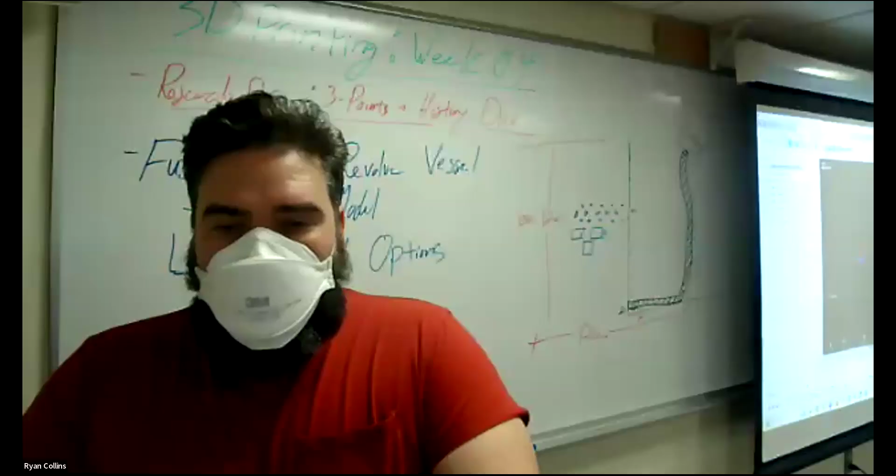Okay, so tonight, like I said, specifically we're working with the Revolve project, making a Revolve vessel, ideally a planter to hold a little plant, using the Revolve tools. So the main goal here is we're simply making a partial profile that we then use the Revolve tool to spin around and make a three-dimensional solid that is curved rather than straight up and down, which we did with the extrude tools.

With that, we're going to use the different tools to cut holes in the bottom, drainage holes, make a tray. We also have some advanced options to make patterns, things like that. We'll get into it in a moment. So let me hop over and we will get to that.

So again, I just showed you this. The basic project simply taking an object, taking that profile, spinning it around using the Revolve tool, which if you mouse over Revolve, as you can see, takes a profile, spins it around a chosen axis or axis point, and creates a solid, round shape.

We're making this in two separate components, not just bodies, but components. If you look here on the project tree, the very top now has this little symbol instead of the solid square that it normally has, a symbol for a stack of squares, or cubes rather. This is the symbol for multiple components.

A component is simply just an organizing feature, just an organizing method within Fusion. But an individual component can have its own origin point, its own bodies, its own sketches. So you can even nest components within components.

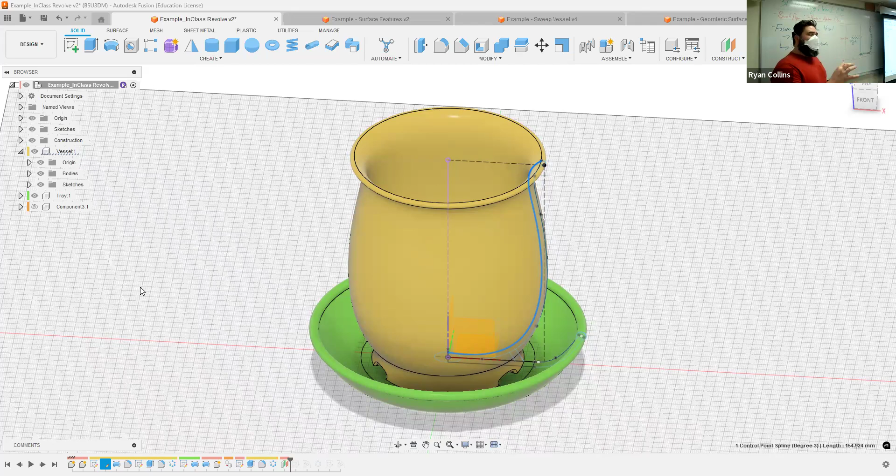The reason for doing that, one, is so you can help organize the whole thing, keep things a little bit separate. The other thing is for how the joint tools work within Fusion, the things that actually let you animate parts. It works by making sure that things are separate components, not just bodies within the same component. So it's not just a way to organize, it's also a requirement feature. We'll get into the reasons why later when it's more applicable, but that's how it goes.

And here we use the extrude tool and the extrude. Actually, in this case, I used emboss because I didn't want the holes to just be straight through. The holes here actually angle with the curvature of the body. So these are all straight through at an appropriate angle all the way around, and then use the circle pattern tool to take that pattern and spin it all the way around the project.

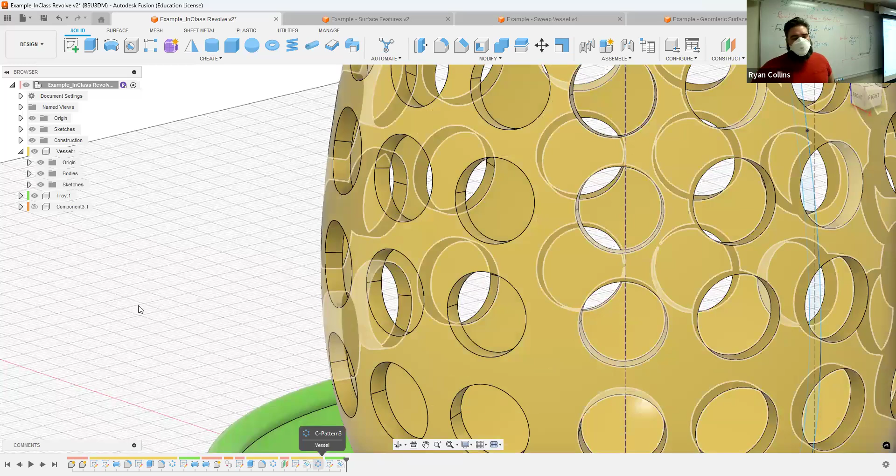The zoom box is in my way. And also the text—text can be applied with the emboss tool to give actual curvature as well, so it's not just flat there. So the whole point there is making stuff actually fit.

For examples, for surface features, I talked to you all about this one. Now this one is very basic, just using the emboss tool to create extrude, or to create projections off the surface. Then I use the fillet tool to round them out.

I also use the extrude on top to cut a profile directly forward, and then use the circle pattern tool to create multiples of that as well to create that scalloped edge. Now, those are just really basic.

I'm going to show you how to use the different tools to create, instead of just single rows, offset rows and such.

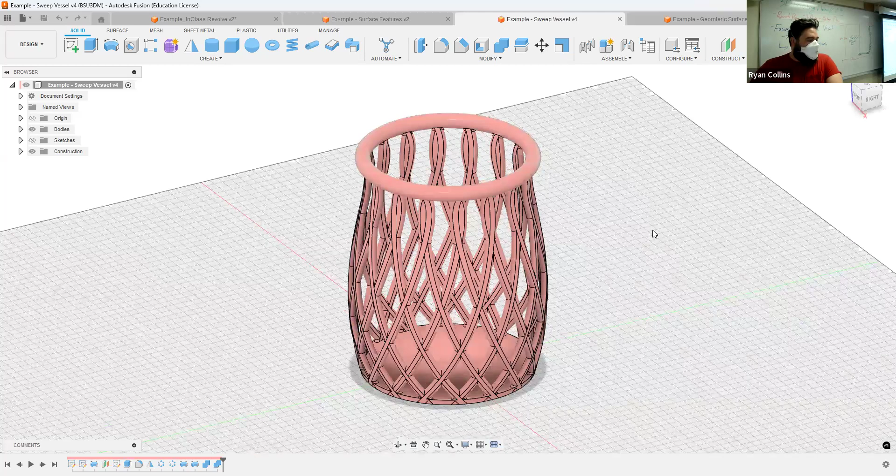We can certainly take that further by using the same tools to create sections and then making multiples of those sliver sections to create things like baskets and such. This is the exact same set of tools, just taken a little bit further. And we could even go really a lot further.

Now, this technically doesn't use the Revolve tool, but this is using surfacing tools to create nested geometric shapes within. So you can see how you can take these really basic things and really take it much further.

So let's start simple. Open a new project. What do you do first? Save, so it'll save. All right, well, problem here is I opened everything and it's still in the keychain project. So open your data panel, make sure you are currently in the correct folder, which is the Revolve project.

Now when I save, it'll be there. Example, in class, we'll say multi-vessel.

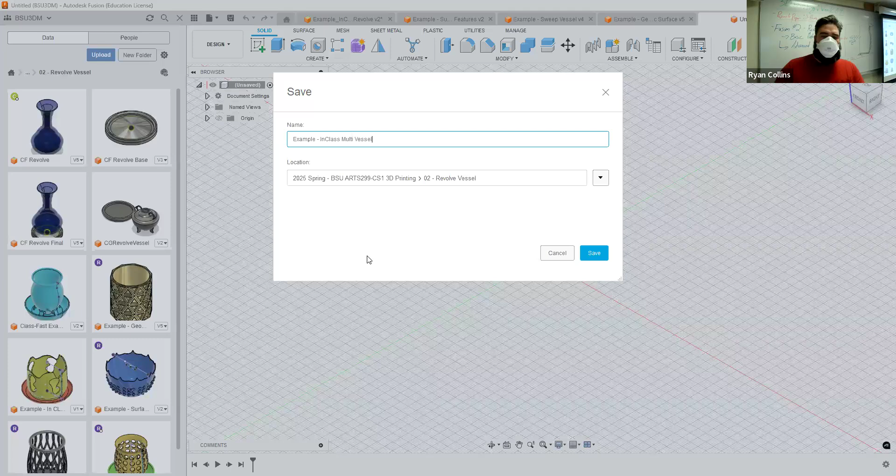So I can just use the same project, and we can do the whole thing together.

One of the quick things is just general dimensions. We want to make it roughly 100 by 120. Those dimensions are rough, you can move it around however you need. That is just a rough guide.

What I like to do is first create a bounding box, and all that is literally a reference. I'm going to create a sketch on the XZ axis, X is red, Z being blue. Working straight in front of me, I'll create a rectangle using the 2-point rectangle tool, snap right on the origin plane and origin point, then write that in manually. Let's say 100, hit tab, and it bounces to the other option, 120. There we go, F6 and it resizes.

Now with this, I don't want to leave this as a solid. I'm going to double click on here and press X on my keyboard, or come over to line type, construction. That leaves it as this little dotted line. That's it, finish sketch. I just want that as a reference point.

If you want to leave those dimensions out, go over to the sketch and slow click this to rename it. Reference box, if I can spell. You right click on there, go down to show dimension, and your actual dimensions will show up. It's kind of irritating that your dimensions don't automatically show up, but at least now you can see what the dimensions are should you need that.

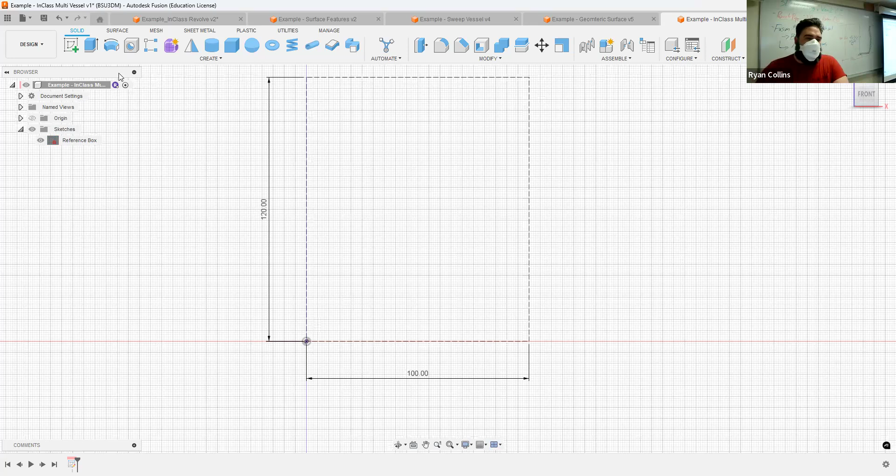Start another sketch, exactly the same spot. It's just that them being two different sketches, I can hide one or the other, make it easier on myself. For this, obviously, you do whatever you please. If you want to bring in a background image to make a reference, make it look like a certain cup or something, more power to you. You want to make it a Stein, you want to make it a Stanley Cup, anything like that, whatever.

I'm just making a basic shape, and because I want it curvy, we're going to use a fit point spline. Start somewhere on the top. You do not have to start at the top, heck, you don't even have to start at the line. You could make it bigger, smaller, whatever. The first two points, it's a straight line between them.

Once you do a third point, now it's starting to curve. If you mouse over and actually get it close to the line, it'll snap and keep on that line, but you can always move those points around. No biggie, curvy, curvy, curvy, whatever.

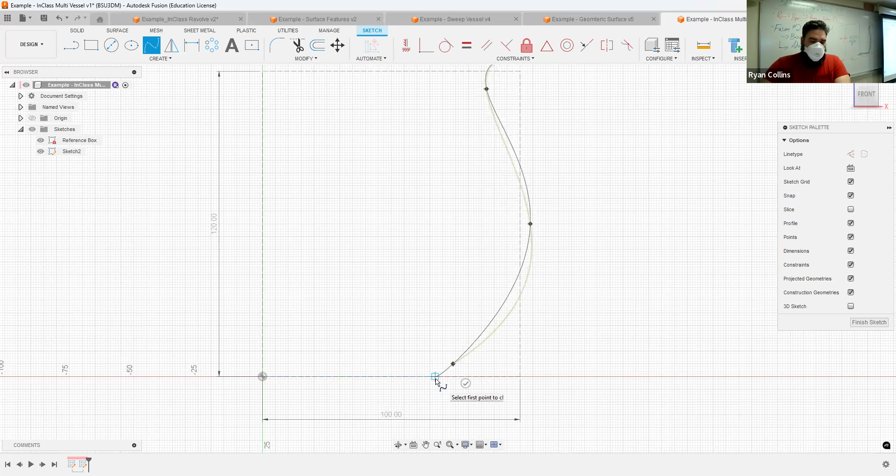From here, you can either keep going all the way, or we can just kind of draw downward, maybe to where it meets that bottom line, make the last point, and hit enter. So you have your handlebars here. We can click and drag our points around to maneuver the actual curve points, or use these green handlebars to rotate, to move the curve, stretch them - gets all wonky, or Control Z, because I don't like any of those options.

And there we go. To make a flat bottom, use a straight line tool from where I just was, straight over to the origin point. There we go.

Now, you can make your own custom inside profile, but like I said, be lazy, let the program do the work for you. I'm going to use the offset tool here. Select there, and I'm just going to drag inward, let's say 3 millimeters - so negative 3 because it's going the opposite direction. 3 millimeters is plenty fine. Hit OK, there we are.

Now, this is still not a closed sketch. These are just 2 lines offset from one another, we still have the gap between. So we can draw straight lines between here - line tool, point to point. Do the same down here, point to point.

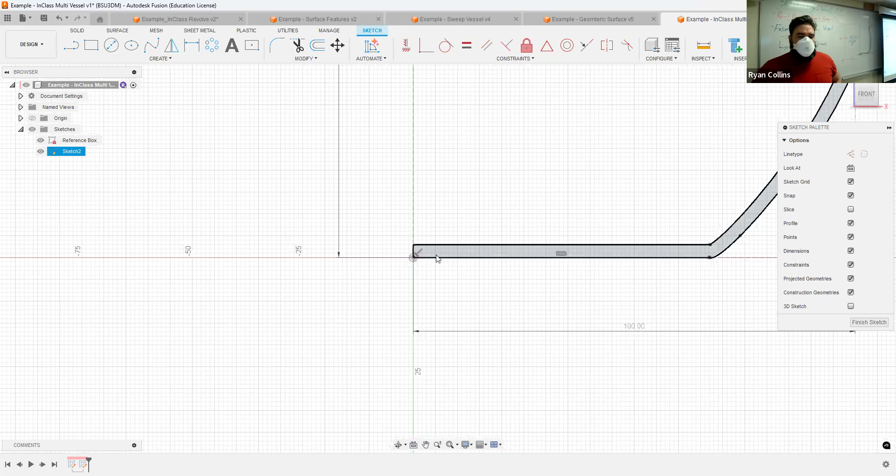It is very important, though, that you do not let this line go past the Z-axis, the up and down, because you want it smack in the middle. You want it right there because that's what we're going to use to rotate around. Technically, you could make it go beyond, but then you're going to have to do some cleanup and trimming, and it's just more work for you, so don't do that.

Now, one quick thing, as I zoom in here, I can see that there's this weird little kick down here. It went beyond them. That's going to make an odd foot, and if I went to print this, there would be a little floating cavity underneath.

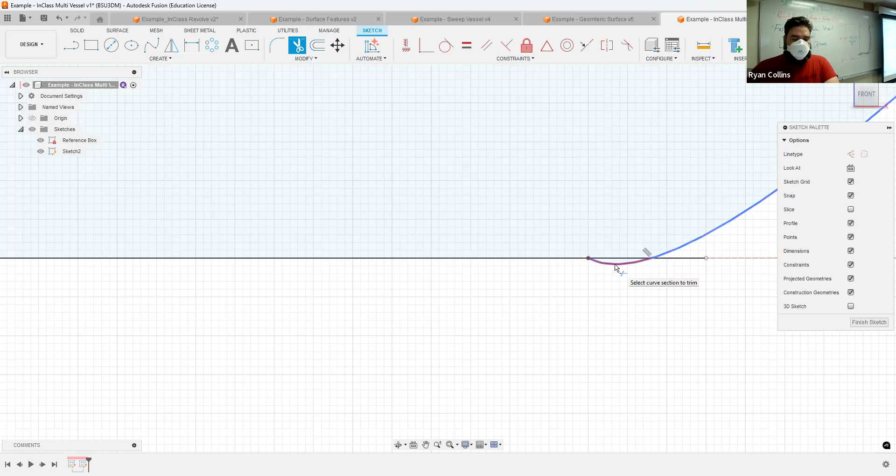So if I want to correct that, I could either use a line tool and draw straight out, then use the trim tool to trim that little chunk off. Or I could click that point, bring up the handlebar, drag it down to match that line so it's a flat line. I could probably even use the tangent tool, but it's no longer necessary there. So that's a place where you definitely can make use of the handlebar tool, and it makes quick work of what you're trying to do.

So there we go. Either one, I can leave that little line floating, or if I really don't want to, I can delete it, or I can press X to turn it into a construction line, so it's just a reference point.

That's it. Up here, if I want, I could add a curvature. Now, I do not recommend, it's really a bad idea to use the fillet tool here, because on an offset, you can do one, but if you do the other, it usually goes all kinds of wonky. See, it's trying to do some really weird stuff. So it's a lot better to use the fillet on the completed edge rather than right here.

If you really want it rounded, go to create and use a different circle, a 2-point circle, and draw from point to point. Now you've got a rounded top. However you want to work it, there you go.

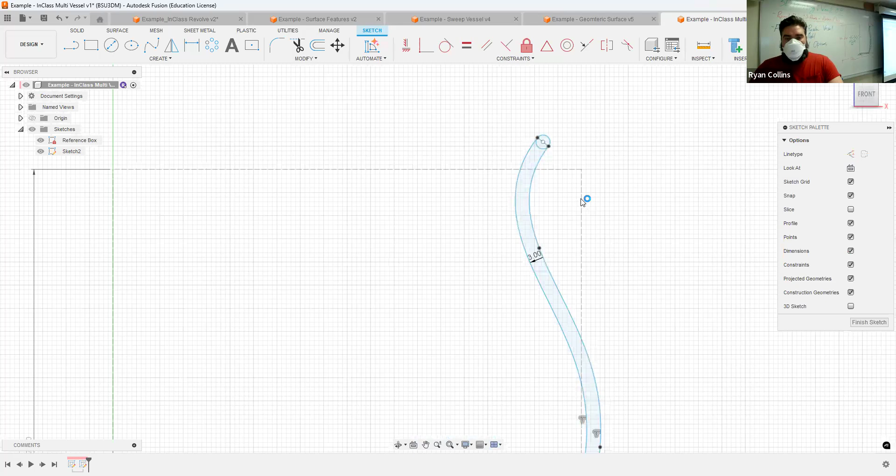All right, finished sketch, and there we are. We'll rename to vessel profile. That'll work.

Hit the home button. Let's save there just for myself, that way you've got some reference points. Profile, cool, or perfil, since I didn't spell it.

Next step is just the Revolve tool. Go there, select your profiles, which is just this one. Double check that you get, if you use that flat point, or if you added the circle, make sure you grab all the things you want to use.

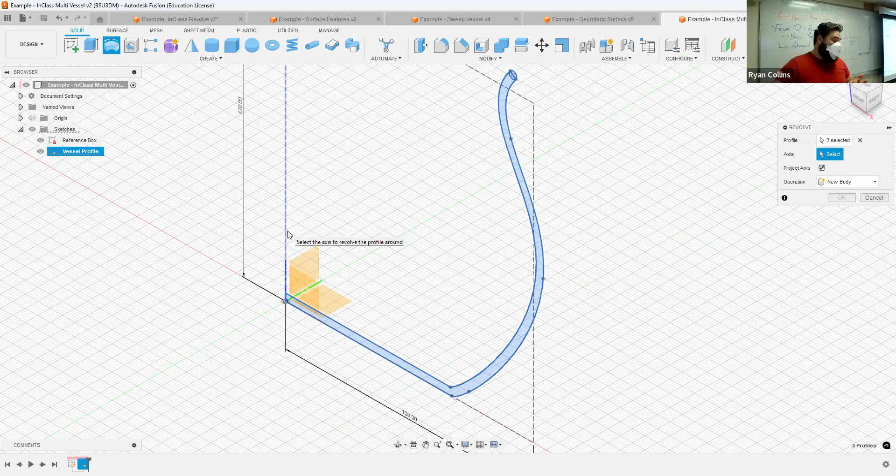Toolbox, go to what is your axis. In this case, that line is also the z-axis, so same diff. It's also why I like to draw that bounding box, it just makes it a little bit easier to see. But if you don't have one, just grab the z-axis, and bam.

Actually, that'd be a pretty nice planter. Anyway, so there you go. That's how you can create that.

If you wanted, you could even say, what if I wanted to make something flat, give it a flat back, and then maybe make a wall hanging one. 180 degrees, only make half of one, then make the backside flat. But in this case, we're going to keep it at full 360 to finish this out. Cool, all right, that's pretty much it.

Now, this one is a flat bottom. I showed you examples before of how you could go back in and alter the sketch if you need to. If you wanted to add feet or something, you could go in and make little kickstands or something like that effect.

And then you could always go in and use the Revolve tool, either the exact same Revolve tool, or you could use that. Let's go through the same process, select that profile, select the axis. In this case, I'm just going to make two little nublets here.

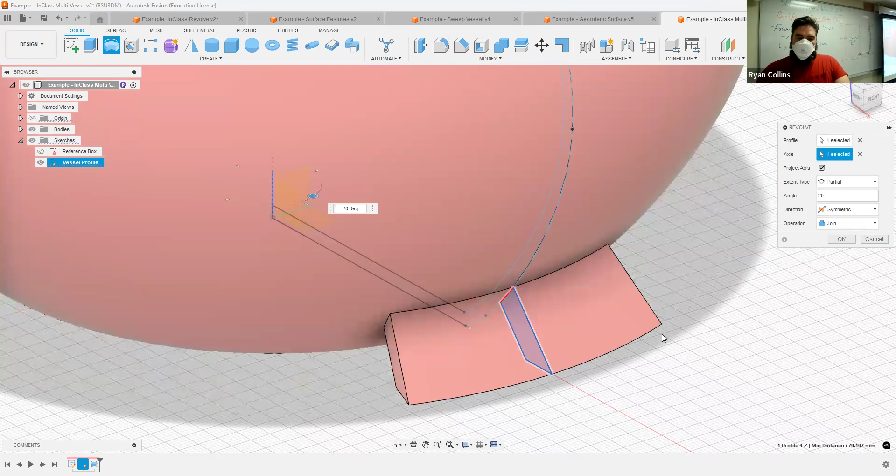And let's say, I don't know, 20 degrees. I could make little kickstand parts and make multiples of those. Go from there. I could use the fillet tool and round that out, however you want to do it. But I'm not going to do that with this one. I think the flat bottom works pretty well.

Okay, now, so far, I've left this right in the middle here, meaning right here as it is. I've not added any components.

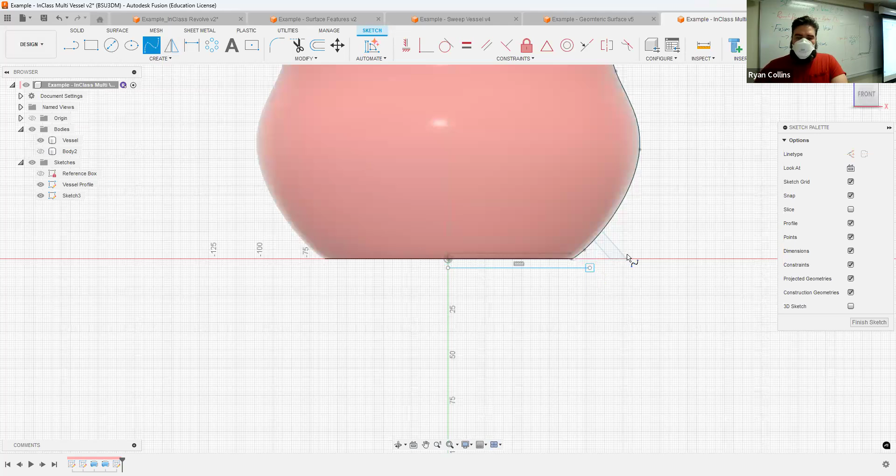One other thing I will do, since I haven't yet, might as well make the tray as well. Do the exact same thing. Sketch, front plane. Your sketch for your profile or for your vessel could either be right on here, or floating, meaning as long as you start at the z-axis, draw outward, and make a straight angle, or from there make the curvature you want. If you want to make it a slightly deeper tray, great.

This would be a point again. You could use the handlebars to adjust that curvature so it's a little bit smoother transition. Cool, that works. Same thing again, offset tool. Let's make it go the other way, or you can have it go closer, doesn't matter. These two objects can be floating apart from one another, perfectly fine, doesn't matter one way or the other. Let's close up this sketch with a straight line, and a straight line over here.

Finish sketch, and I'll rename that tray profile. I keep misspelling profile, I slip and forget the O. There we go.

And then revolve, real straightforward. Axis, there we go. This one we do not want to do partial, we want to go full 360. All right, gonna hide the sketches for now, leave it be.

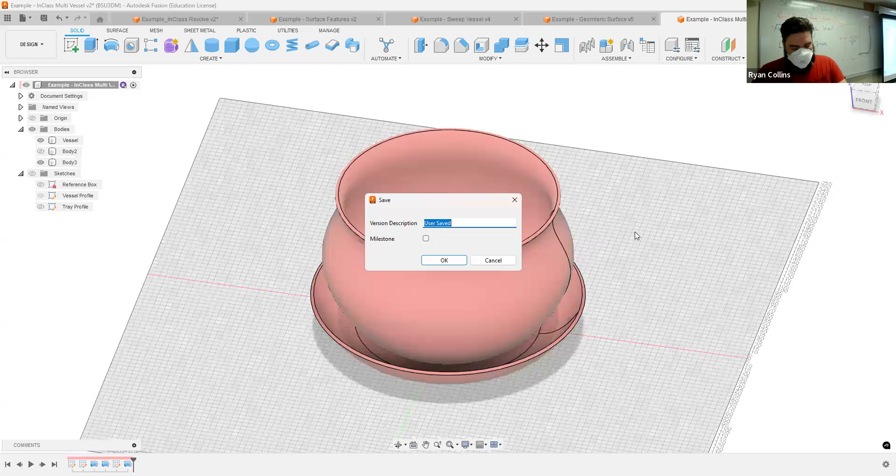So that's my basic vessel. Yep, we're still going to add holes, all that kind of thing, show you how to do that in a moment. Let's save. Vessel and tray.

So one of the major parts is I want you to put these in their own components. To add components to a project, go up to Assemble, and this little block stack symbol, or if you make the drop down, it's the very first one, new component, tells you it just creates a new component. Hit OK, and let's say one is going to be vessel.

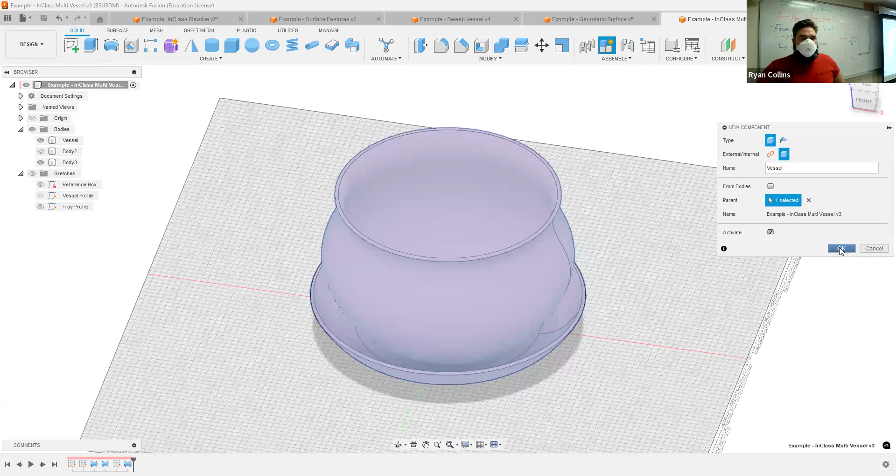Now, don't have to hit anything else here, but if you leave this checkbox active, what will happen? Look at the very top of my project tree, upper left-hand corner of the view screen, this little circle with a point inside—that means the whole project is active. Now if I hit OK, that's going to go away, and it's going to activate the new component I just created, vessel, and anything outside of that component is now ghosted out. It's still there, it just brings the opacity down so you're not focusing on that. If I build anything in this component, that is going to be the focus, and that's how you can isolate things. But if you want to bring stuff over, all you have to do is click and drag.

So I want this vessel into this component. Click, hold, drag, highlight right on the component part, plop—brings it down, and since I have auto color on, it brings that to auto color. If I go back and activate the whole project at the very top, you can see that now the vessel is yellow and the tray is that kind of peach color.

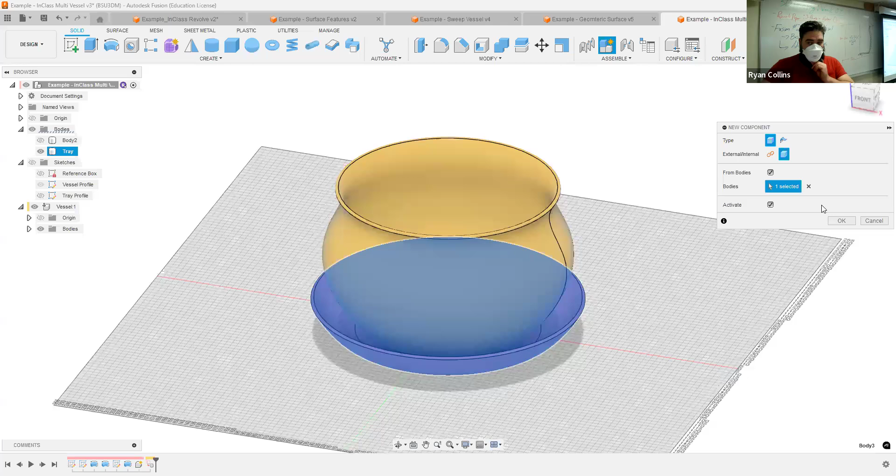Do the same thing—or what you can do, I forgot to label that. I currently have the whole project active, and the tray is what is highlighted, just selected. Now if I go to new component, it is automatically selecting that, and it's not even letting me add in a label or anything. So now when I hit OK, still have activate on, that automatically pulled that object into a new component and activated it, giving it a new auto-assigned color, turquoise.

So now when I go back up and activate the entire project, you can see they are now multiple different colors, just shows you the different colors so you can more easily see it. Again, how I'm getting that is press on your keyboard Shift-N, Shift-November, that goes back and forth between the appearance tool. The default is like brush steel or something; Shift-N gives it auto color just so you can see what you're doing a little more clearly. Those are two different ways you could bring objects to their own new components.

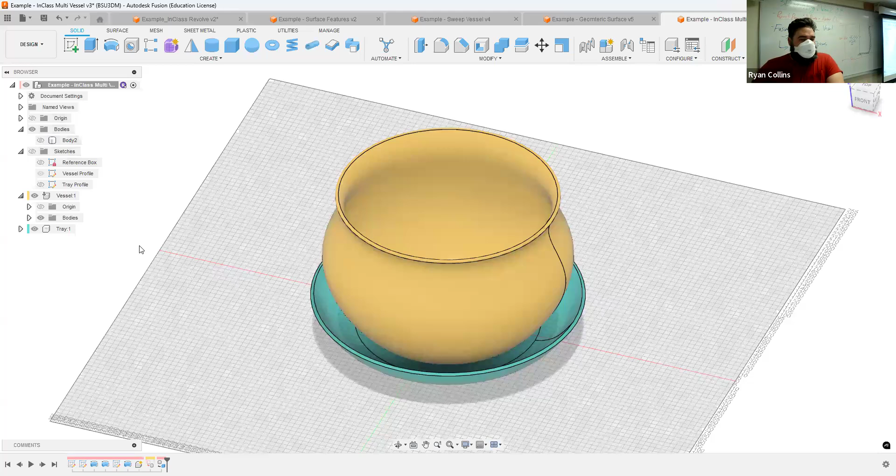All right, so next I want to add holes to my vessel so it's not just a bowl. If you want to make a really nice cup, that can happen too, but for the sake of the project we're cutting holes in it. Now, before, all the objects and bodies were in the main general component; now they're in the isolated one. So I want to make sure the holes are only created and affect only the vessel.

So what I'm going to do is drop down, activate the vessel project—see how the other part ghosted out? If you don't want to see it at all, and it's kind of interfering, hide it, toggle the visibility. So the easiest way to do this is just cut some holes in the bottom by sketch and extrude. I'm going to orbit down, select sketch. Now you can either use the standard plane, or you can actually select the bottom of the object itself—if it's flat enough, you can draw directly on there. But in this case it doesn't really matter, so I'm just going to select the plane, and we'll use the object later. Select there, there we go.

So in this case, just a circle is fine, somewhere right on this axis. Let's say about there—I don't know, 5 millimeter hole, 6 millimeter hole. That seems reasonable. If you want to make it larger, 10, sure, whatever.

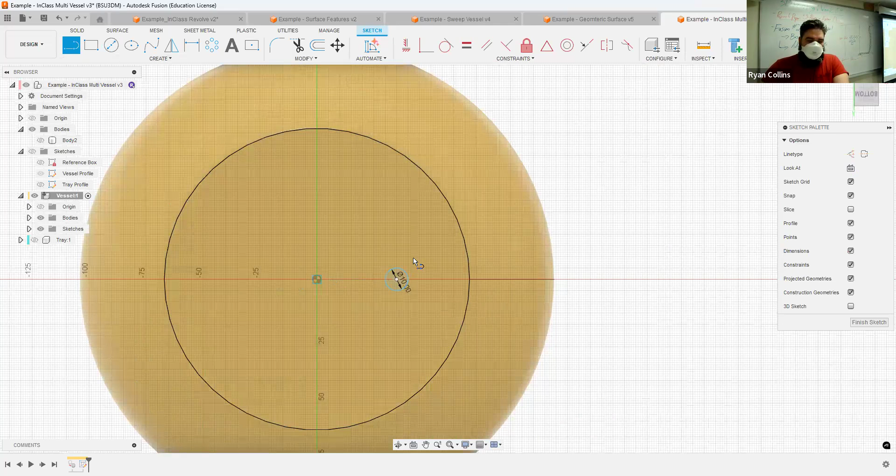Now, I did not assign a distance there. If you want, we can use a line tool. Start at the origin plane and end right at the center of the circle, or draw this line first and then create a circle at the end of it.

Now, the reason I might want to do this is, let me use the dimension tool. Bring that out—that just shows you now the dimension is visible.

That's all. Now, the reason I might want to do this is, remember what we talked about the first day? Parametric modeling. What I can do is finish all of this, get all the holes down, and then realize the holes are too far out, or not far out enough—they need to be changed. I don't want to go in and change every single one, or I would need a very specific length.

What I can do is go in here, double click on the line or on the dimension, it brings it up, and say what it should have been. It should have been, I don't know, 30. Hit enter—it's going to move that circle dependent on the end of that line.

The other point is right smack in the middle of my project, the origin point, so that's locked in place. But this point can move around if need be. I could even click and drag.

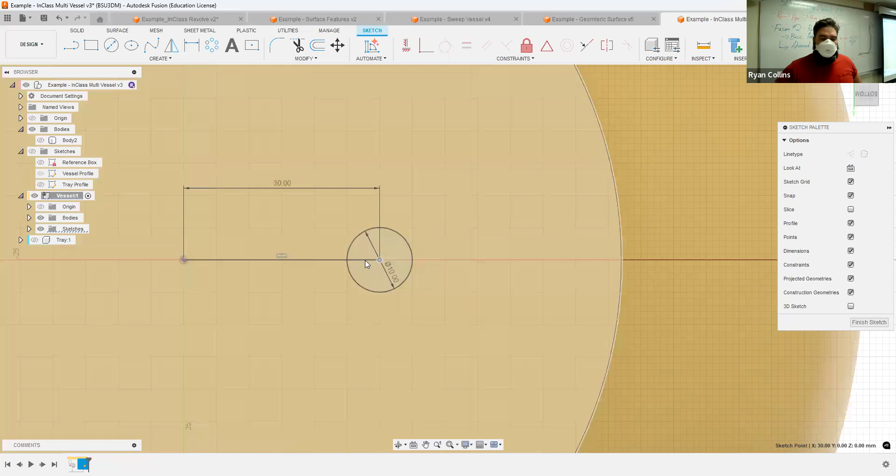If I bring up the move tool—no, it's locked in place too right now. If I needed to, I could move that around, but right now it's locked. So the only way to change it is by changing the dimension, changing it numerically.

So 40, I don't know—it's going to keep moving around, but that other point is smack in the middle. So it's a really easy way to change things.

Now, if I want to make sure this line doesn't interfere with anything, select it, press X, or change the line type to construction—just change it to a dotted line. Now it doesn't interfere with anything. All right, cool. Finish sketch.

And with that, we're just going to use the extrude tool, select that circle, chop it up. Now, again, you can just drag it upward, no biggie.

Or if you're unsure if things might change, an easy way to do this is you have all these options in this toolbox. Start where it started—start plane, that's fine. Direction, it's only going one direction. Right now, the extent is how far that operation goes—the extrude distance. But let's say I want to make sure it stays at a certain spot.

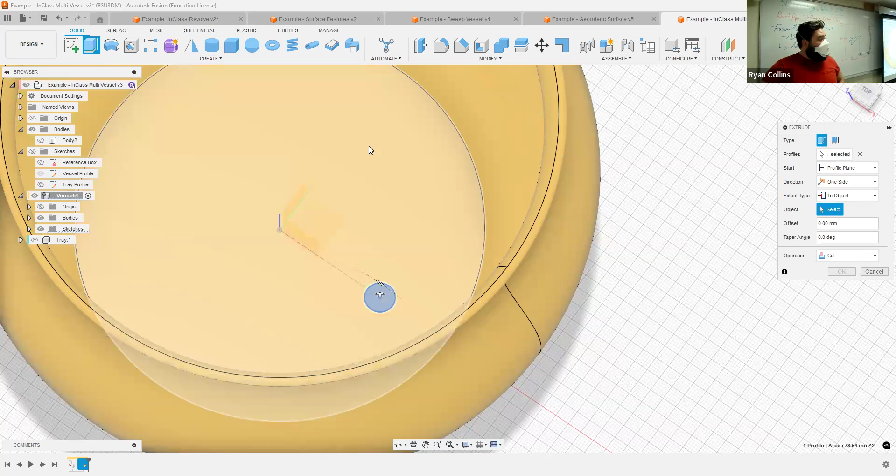If I select there and go to object, and just select the inside face of this vessel, it's only going to cut through all the way through the vessel. But that also means that no matter how thick I make this, that hole will always cut all the way through. That's especially important if, say, I modeled something inside this vessel.

If I had just drawn that extrude at an arbitrary but way too high a length, it might accidentally cut into whatever I modeled inside that vessel. But if I make the extent only cut to the other side of this, no matter what I change, it will only affect this vessel's bottom thickness, and it'll always cut all the way through the bottom thickness. Long-winded way of saying, if you just select the other side and have it cut to that, you don't have to worry about it messing up anything else.

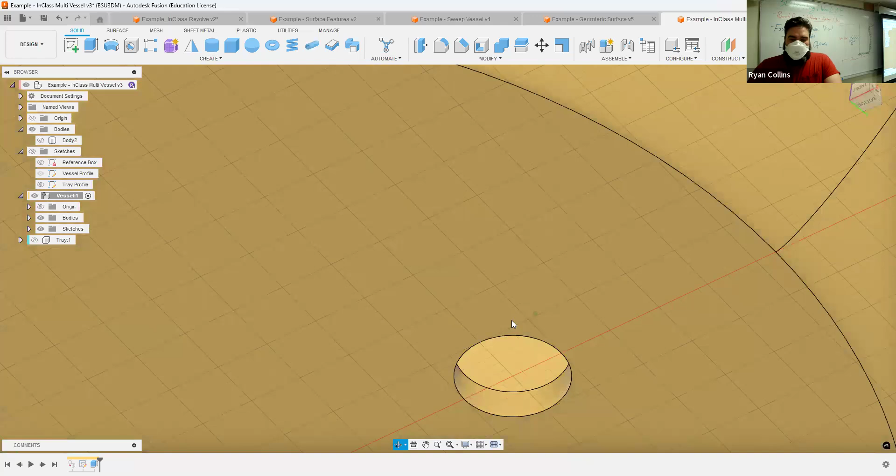Okay, so we talked about using fillet and such to make some curvatures. With that, I can go to fillet. Want to make this rounded, select the inside, or go to full round, and it makes it completely rounded there. Easy, rather than trying to find just how far can I go.

I definitely recommend, though, when you're adding fillets and such—you can click and drag and it'll keep recalculating, but honestly that's a really easy way to bog down your computer. I recommend just doing it numerically. So, I don't know, 0.5—you can see where that gets you. Or, all right, 1, something like that.

If you do it numerically, you have less chance of the computer trying to calculate some really weird stuff from dragging it too far. So you can keep going at it that way. Or in this case—oops, I didn't mean to cancel that—go to full round, and that's just going to make it completely rounded.

Okay, so now that I finished that one hole, what I can do is use the pattern tool. So: create, pattern, circle pattern.

I want to make that feature repeated, so I'm going to go to object type, features. That makes that whole thing right there. My axis, same one, the z-axis. Now it's going to make multiples - you can make however many you want, 3, 5, 77, whatever. That might be a bit much - lots of drainage holes, okay.

I was running into the same problem last time. For whatever reason, I'm getting this error over here that it's giving a compute fail. I don't know why - crucial face is missing. I don't know why it's doing this, it's a simple operation. So if you run into this, sometimes it just doesn't want to work that way. You've got two options to fix this.

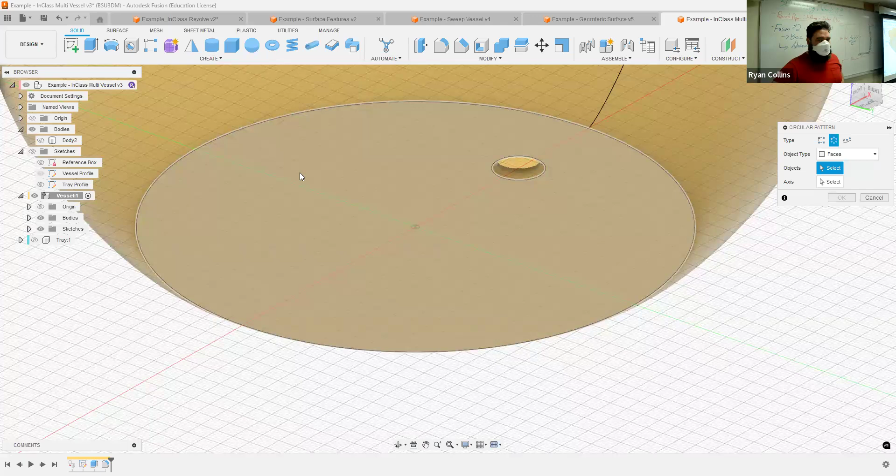Let's try repeat the circular pattern, and instead of features, we're going to use faces, which a face is just the plane between edges. So even if that's a curved edge, a curved plane, which is the feature we just created, let's try it this way. Select there, axis, the exact same. We'll do 3 and see if it works. Same error. Okay, so I still don't know what's causing this.

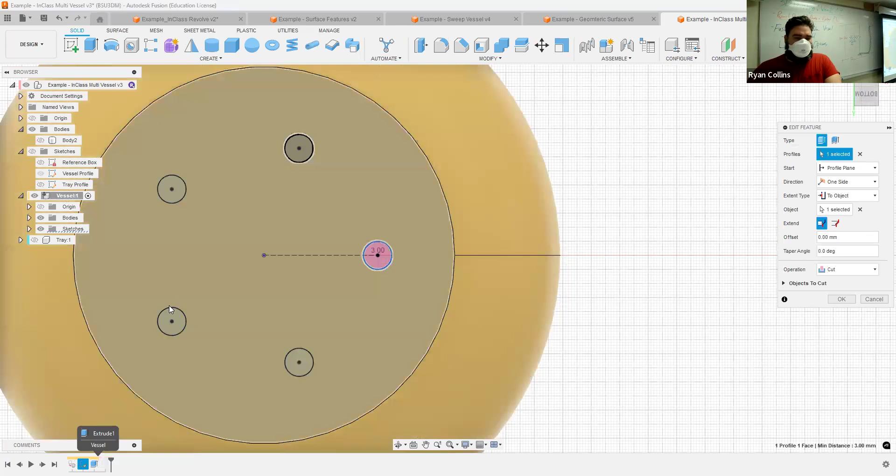I was getting the same thing. So if you get an error like this, no matter what you do, what you're going to end up having to do, go back to the sketch, edit sketch, and you're going to have to use the circular pattern tool to make patterns straight through the whole thing. So unfortunately, I got to select there, my center point. There we go, 3, however many you want to make - we'll say 5. Okay, finish sketch. The extrude, edit that feature. Now I got to make sure to select all these holes individually. Cut. Okay.

Same thing for the fillet, full round. Now I got to make sure to select the inside of each one of these. If it's not letting you, you can either use the plus or X sign here - this just allows you to add multiple things to that same feature. And if it's still not letting me do all of those, for whatever reason, sometimes this toolbox comes up. If you've already done something, it doesn't want to let you make multiple selections, add multiple selections to it. I don't know why. If you run into this, what I've had to do is just delete that last feature and start a new one, doing the exact same thing.

Fillet, full round. Oh great, now it's not letting me do it at all. Fine, let's see if it'll let me select all of them. Okay, awesome, so I guess usually that works - delete the whole thing, redo the tool. Now you can select multiples before you make the effect. I don't know why it's not letting me. So if you run into this, add selection - just going to have to do this individually. That is frustrating.

I bet if I just used a regular fillet, it wouldn't have done this to me. All right, why is it... what? Select faces that are adjacent to the center faces. Ugh, you are just being a pain in the ass tonight. All right, I'm recording. Fine, we'll just use the regular fillet. For whatever reason, it is just not wanting to cooperate. I just want to make these rounded.

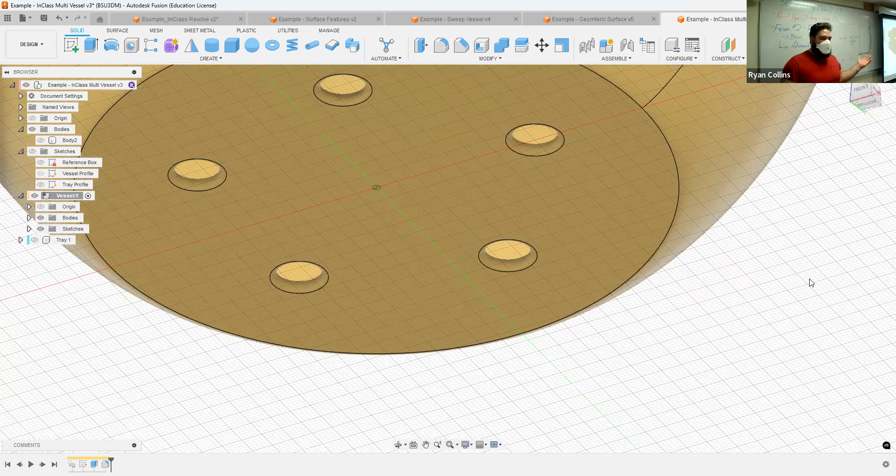So what did we say - 1.5? Sure, 1.5 apparently works as a full round. There, the exact same thing. Sometimes you run into just stupid stuff and you got to deal with it. All right, whatever, okay, so there we go - vessel is complete, we got a tray. Go back up, activate the whole project. That's more or less the whole thing.

Drainage holes - I guarantee I did not spell that right. All right, so that's the really basic bit. So obviously, I expect y'all to do more than this, so we'll go from there. So let me pause here, and then we will start adding some stuff, some features and such.

Oh, I was just pausing the screen sharing, not the recording. Okay, so let's get back on this. Sorry, I had to change this out.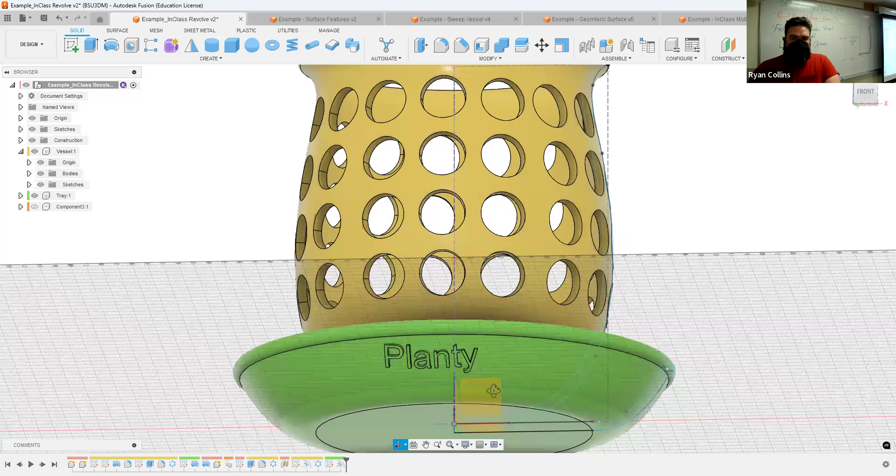Okay, so we did the basic stuff. I want to show you how to make some alterations using some different tools. Now, I showed you these using, this is extrude pushing outward. This is actually using extrude cutting straight through, because if I look straight down at this, actually all of these circles line up - it's all radiating from the center point, the ones cutting from the outside. Same thing goes for text and such. And then the geometric stuff is far more complex, so let's look at this.

Just for reference, I'll repeat what I got down here. Let's activate the tray, and we'll add some text to the front of this. So to add text we're going to use the Emboss tool, which is under Create, Emboss. That creates raised or lowered surfaces relative to the surface.

Basically, it's a three-dimensional offset tool. So to do that, I want to create a sketch. Now, usually you can make a sketch floating inside the object, but sometimes it throws stuff off. So if you can't, or if you do that and it gives you issues, what is usually much more preferable is to create a plane in front. So I've got my vessel, but I want to create a sketch floating out in front of it. You don't always have to, so if we need to, we won't. If we do have to, we'll use it, but there we are.

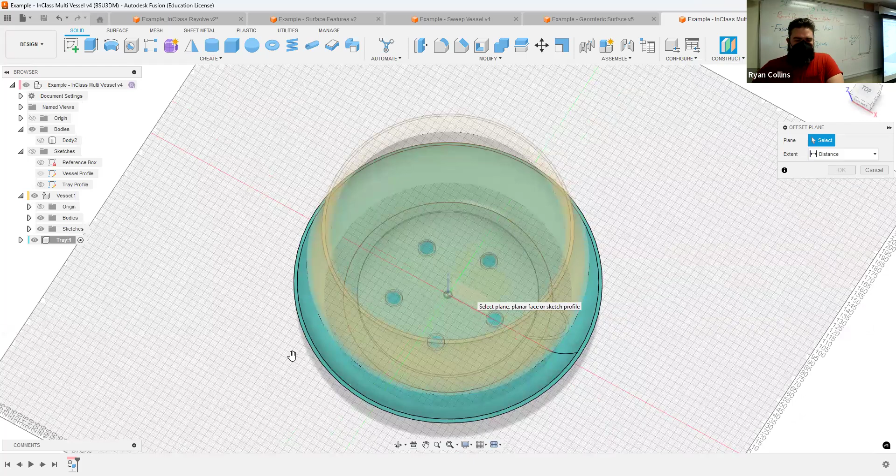So what I want to use is a plane floating in front. This is an offset plane, a construction plane. It's literally just a virtual plane that you work from elsewhere because you can't draw a sketch on a curved surface. So I want to select the same plane we've been working on, the XZ plane, and I'm just going to drag this somewhere out in front, somewhere outside. Doesn't matter, 200 is probably excessive, but whatever. It is irrelevant.

So I'm going to create a sketch on this plane. Select there, snaps to front. If the vessel back there is getting obnoxious, let's hide that. And I'm just going to create text on here, but let's make it a little bit fancier. Couple things. Text, you have to have a box or a reference, something.

So actually, I want to create a fit point spline to be my profile because I'm going to make text on a path. All right, doesn't matter, doodly-doodly-doo. I'll hit X to make that a construction line.

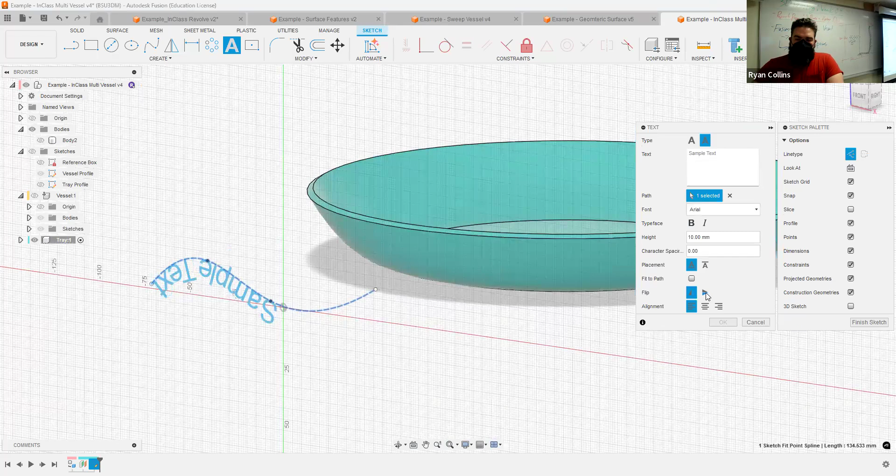Now, if I go to text, instead of regular text, which is just click and drag, make a text box, boring, flat, straight in the middle - why waste there? Let's do text on a path. Now I got my path. And of course, it flips things around, so right now it's showing upside down and all that kind for reasons. So what we're going to have to do is use mirroring tools here to flip it. There we go, eventually got it right.

So you got some other options here at the bottom, fit to path. That stretches it out so it takes up the whole space. You, of course, have different fonts and all that kind of stuff.

Let's say... Ol' Drippy. Now I got Aquatine stuck in the brain. We can make it boldface. Let's make it something more exciting than Arial. Ol' Drippy, fancy - there we go.

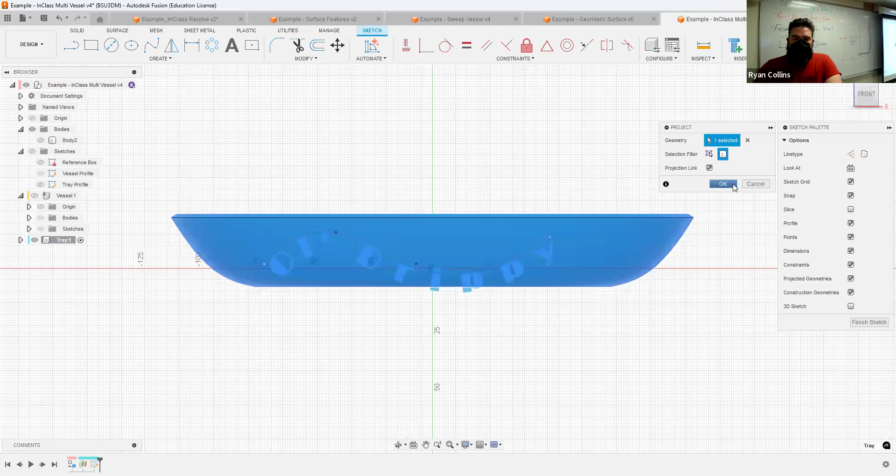So you want to make sure that your sketch is, in fact, floating in front of your profile. If you're having difficulty visualizing that - I'm going to move this around in a moment - what can be effective is to make a projection of this curved surface. So I can either just press P on the keyboard or go down here to project include, the first one, project, and I'm just going to select that body of the tray. So when I hit OK, if I was to hide the body of that tray, now I have this nice clean outline of that object that I can actually interact with. It's a really convenient tool to work with.

So realize that unfortunately text on the path doesn't put it right in the middle of the path, it puts it above or below. So what I have to do is just adjust that path. No big deal, select it, press M to move. Let's drag it upwards a little bit. Maybe we try to center it a little bit. That seems reasonable-ish. All right, finish sketch.

Unhide the body. Did I hide everything? What did I do here? Bodies, there we are, okay.

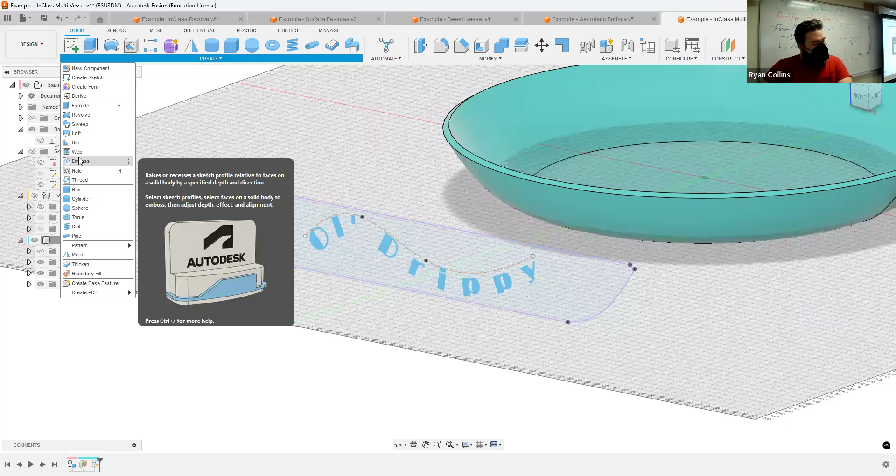So now what I'm going to do is use the Emboss tool, not Extrude, because the difference is Extrude takes that and just creates - now it's selecting the entire thing there, that's there - and that makes a direct straight back. I don't want that. I want emboss, so it starts at the surface, this curved surface. I'm going to select my sketch profile, which is just the text, and the faces is the curvature of my bowl.

Great, what did I do? What's the problem? I got an error code: sketch profiles are not coplanar. Deselect sketch profiles that are not on the same plane. What are you talking about?

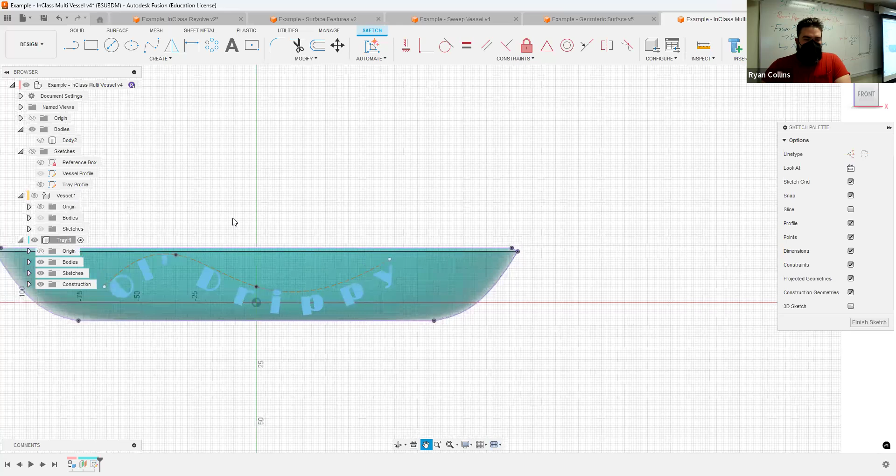What is the problem here? Never fails to find something wrong. All right, probably just because the text is a little too large. Let me adjust that slightly. Might be because it's getting too close to the top and bottom. I genuinely don't know. Let's try to put this a little bit in the center, which is again why that project is a little convenient to work with. All right, let's try that again. Emboss, where'd you go? There we are. My sketch profile, just to that.

The faces. Yeah, I know it's not the same plane. That's kind of the whole point. Deselect sketch profile. Never fails, do something, otherwise it works just fine. Now, not so much.

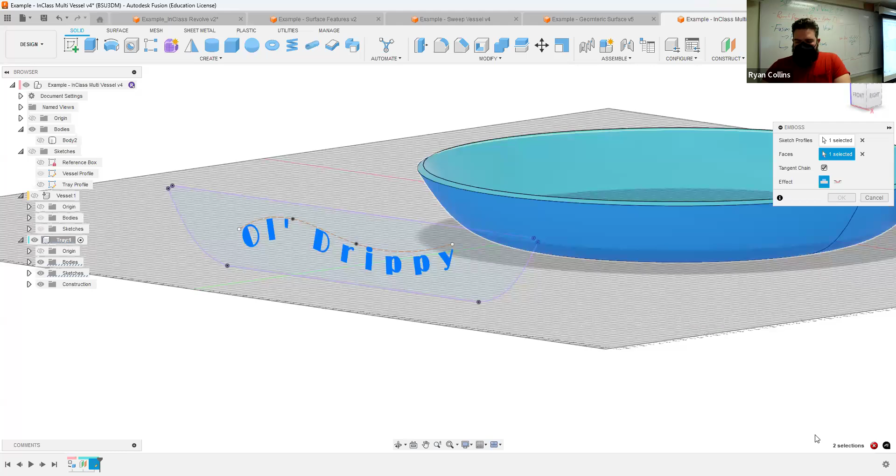Give me a second, let me just pause this for a moment. Okay, I found out what's happening. I don't know why it's happening, but I found out what's happening. So the issue is I kept getting an error saying that the sketch is not coplanar with the surface. What that means is that it doesn't match up.

But the reason why every time I made a sketch, I ended up trying just making one smack on the regular plane here, for whatever reason, and I was working from the front, it kept flipping my text and everything. I don't know why. So I would have to go into the text when I made the text box and mirror it, stuff like that. Hit OK. The problem was, even though I was working back here, it was trying to create stuff on the front of the plane, regardless of the fact that my sketch was floating out in front.

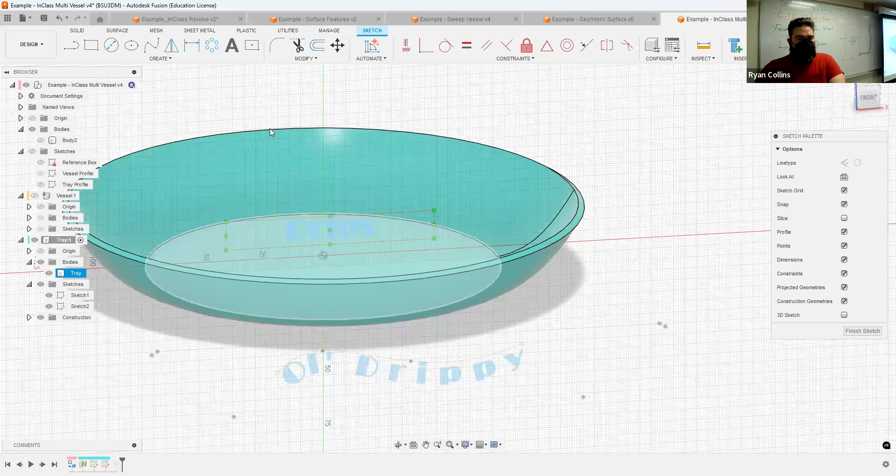So it kept flipping things to go the opposite direction. I don't know why. So the error was that it's not coplanar. It was trying to create my embossing on the opposing side away from where I had the sketch floating out in front. So I had the sketch floating out in front, and it was trying to create the emboss on the back side, and that was causing all kinds of errors. When I redid it, creating the sketch floating in the center on one of the origin planes, finish sketch, you can see the embossment created on the back side. So it's reversed. I have no idea why it's defaulting to that. So, yay, finding out new problems.

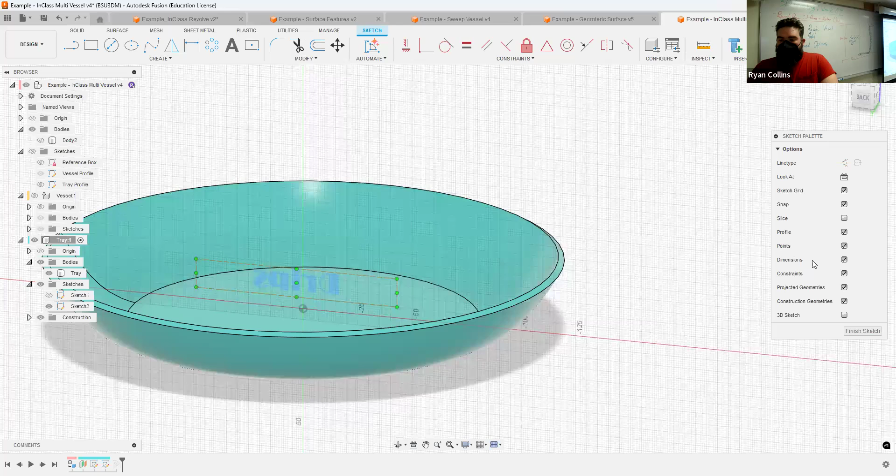So with that, it's backwards. If I want that to read correctly, I have to go back, edit sketch. Let's hide that first one. If I could select what I'm doing here. And I'd have to mirror that. So now when it finally extrudes or embosses properly, at least it's reading properly. It's just on the backside for whatever reason. All right, that's fun.

So the whole point of trying to do this, what I wanted to show you, is I made an embossment, or used the emboss tool to have the text floating forward, and you see it matches the curvature of the surface. What I can do with that is go to create, use the circular pattern, select those faces, or ideally select those features to grab it all as one thing. Let's see if it's going to let me do this, because I think it just selected everything. Select the z-axis. Yeah, it's making a whole bunch of instances of the entire object.

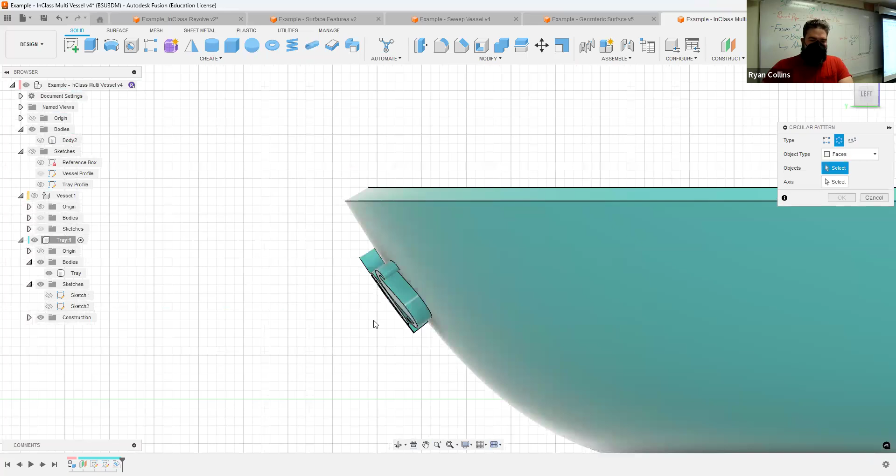So apparently Fusion is just really being weird tonight for me. I'm going to have to go through and select all of these faces individually, or hopefully I can use a selection box from the left, which will only select what it entirely encapsulates. All right, good, that does work. Axis, the z-axis, and now I can use that to make multiples of the same, text, sketches, whatever, and it will make multiples of that all the way around.

Now, hopefully I don't crash it. There we go. Okay, so that was an obnoxious, roundabout way of doing something painfully simple. So let's save there. Emboss text. Okay.

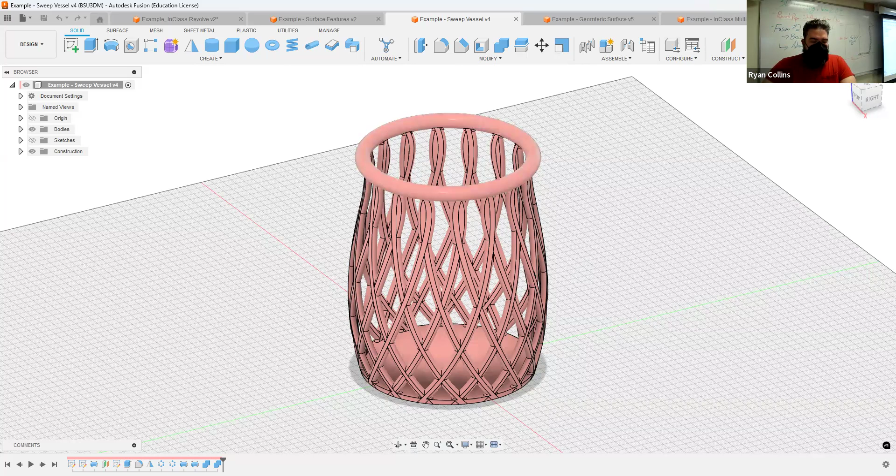So now let's do some stuff on the vessel itself. I hid the tray and all of that. I want to show you how to do some things, like making this basket form. How would I go about doing something like this? Well, to do this, what I'm actually doing is making a cut. I drew a sketch, or I made the object, I drew a sketch of just this line here. See how it just traces along the edge and makes a curvature?

I made that sketch, and what I used is extrude, but I used the tool intersect, which means usually cut or extrude either stretches what it's drawn or cuts away. The third option is that it gets rid of anything outside of that sketch, so I'm just left with that little sliver there. Then I use the fillet to round it out a little bit.

And then I made sure, because I want it to go in both directions, I made a mirror of the same. Then I use a circular pattern tool to create a whole bunch of one type, then a bunch the same amount going the opposite direction, joined them all together, added a top ring and a base, and joined them all together to make this form.

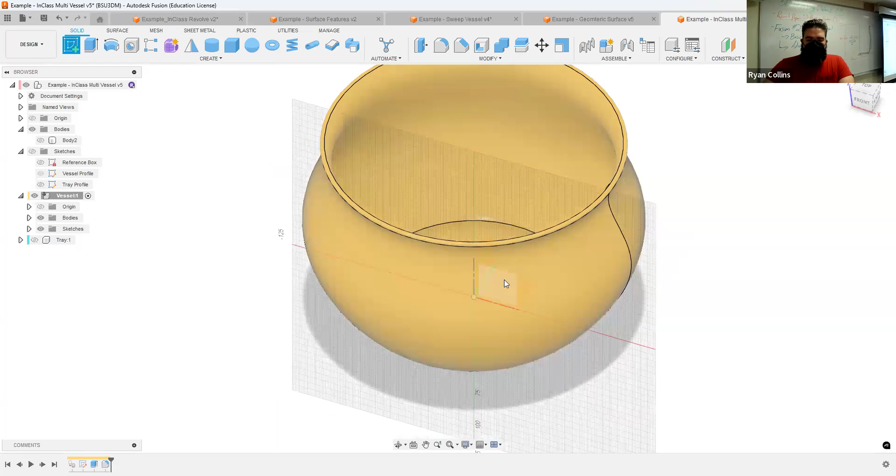So something like that, I could make all kinds of versions of this, or I could make a pattern cut straight through, or use the same and make it an embossment. So let's try that. Because of the issues we were running into, let me hit sketch, and the vessel component is currently active. Let's work on the XZ plane straight in front. But I am working inside.

So let's just draw a little bit here. Let's draw a simple pattern. Let's do a line. I want to make this a construction line. So from top to bottom, or bottom to top apparently, right about there. Great.

So what I can do now, let's make a line. As I mouse around and get closer, you'll see a cross with a square around it, meaning I'm selecting right on that line, which is also right on the axis. But as I get to the middle point, that little arrow, that triangle symbol, means center.

So let's make that 45 degrees so it is directly diagonal. Cool, there we go. And then I want to make sure I'm going the same way both ways. Let's make that even. So that would mean, let's change the dimension of that one to make the whole thing 100.

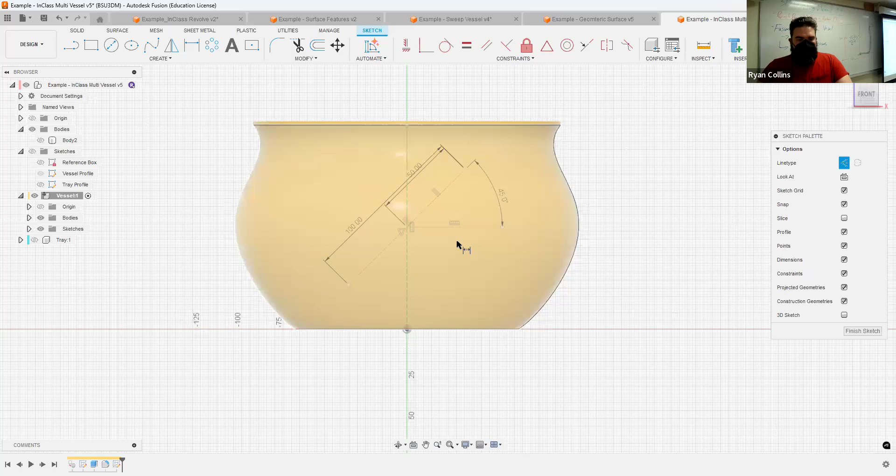So 50, that means the overall one is... nope. Stop picking what I'm not picking. There, I want to make that one 100. All right, the reason I'm doing this is I want to use that to create an offset.

I'm just creating... I don't want to grab all of these parts, so let me go to where it says chain selection, deselect that, and it'll let me just select that one spot. Why is it all curving now? Just nothing working correctly tonight. I don't want that, I just want that. There, thank you, please, and thank you.

All right, I don't know, minus 2, does not matter, repeat the offset. Same line, 2. Cool, I'm just using this to create a square. Oh, those keep defaulting to construction lines. Cool, there we are. All right, trying to make it simple, but apparently it was disagreeing.

All right, so with that, yeah, let's hit finish sketch. All right, so what I could do, I've just made a sketch floating in the center. I've got a couple options of stuff I can do with this. I could say go to emboss, select that profile, faces.

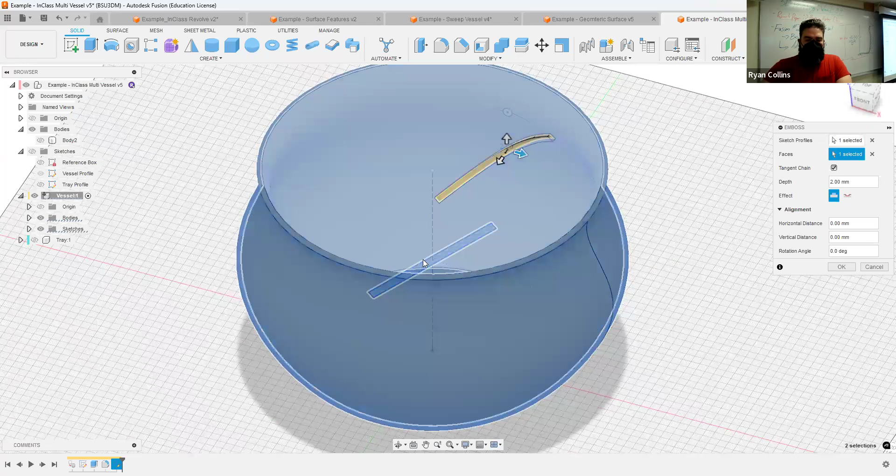And let's see where it's working. All right, so it's working on the inside because the sketch is on the inside. Should have been working correctly, but whatever. If I deboss, it'll cut, and if I want, I could do that all the way through.

But I could also use this to create on the outside, ideally. I was trying to get this to project outwards, so that's when you need to actually have the sketch floating outside. But it was working all kinds of screwy, and it wasn't agreeing with what I was trying to do anyway, so I don't know.

But instead, what I want to do is use the extrude tool to slice through, and in this case I am just using it to cut through. Again, I could do extent type just to the outside of the object, so it's going to chop all the way through. Cool, default operation cut. Good, so I got that slice in there.

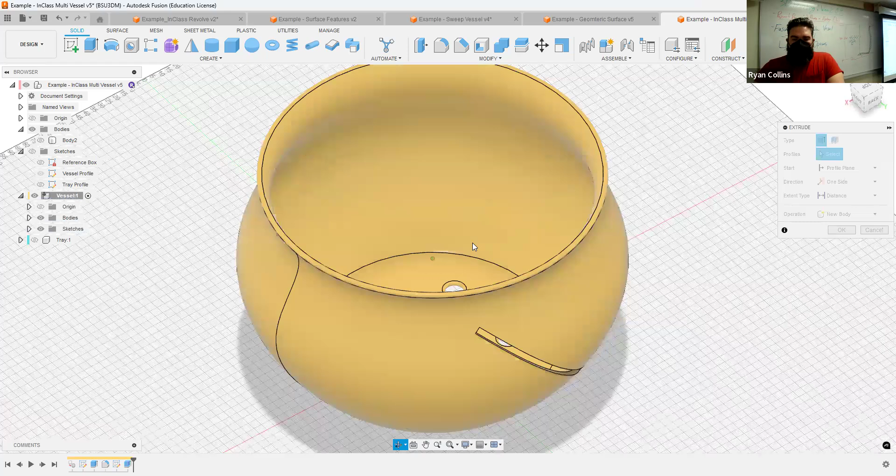Also, I want it going both directions because what I'm going to do is create a cross pattern here. So with that extrude, actually what I should do, since it'll automatically go the opposite direction for me, let's instead go symmetric so it's going both ways. So now it's cutting both ways. Cool. Oh wait, no, I confused myself doing that. I don't need it going symmetric.

One side is fine, I just need to make a mirror of it. There we go. All right, that is really confusing that it's doing that.

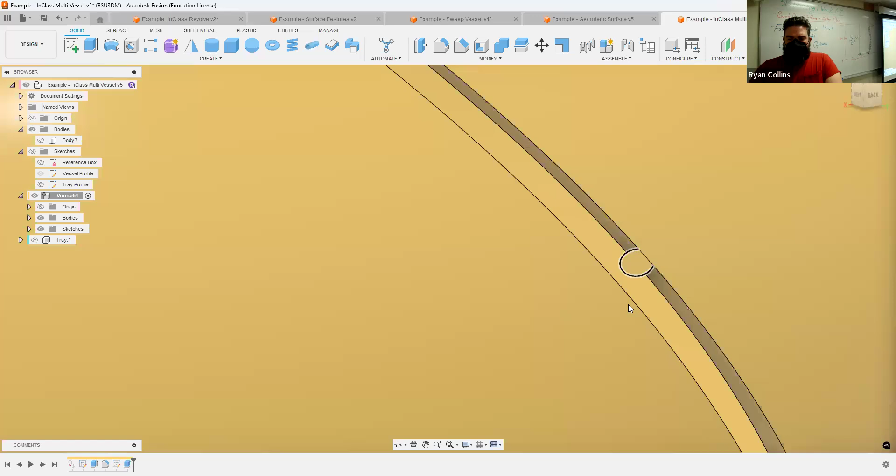So since I want to make a cross section here, I can use here, mirror line. There we go, that's what I wanted. Finish sketch. And because it finishes stuff, it keeps hiding stuff on me. Oh, what is that circle floating out there? Cool, new artifact from somewhere. Oh, this is just bound and determined to be the weirdest stuff tonight. Where is that circle coming from?

I don't know. What is that? Okay, somehow it created, there must have been a circle somewhere, and somehow it created that little floating thing. All right, super weird, I have no idea.

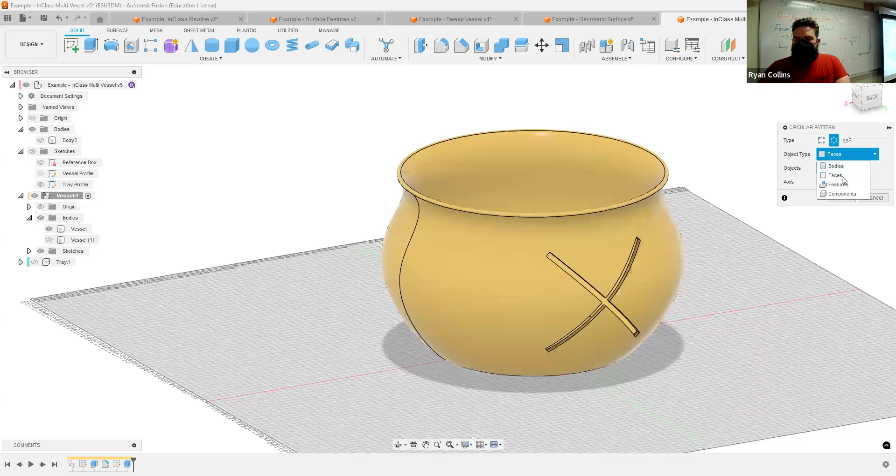Anyway, all I was trying to get to is, I cut through, made this pattern that is within itself going both directions. So now when I go to circle pattern, and try using features, it should select all of that. But it's also selecting that little weird doodad. My axis is on the Z axis.

So this is going to look super weird right now, repeating pattern all the way through. Now, obviously, this would not function at all because it currently has a floating square in between there. So if I was trying to print this, it simply would not work.

So this would obviously work a lot better if it were straight up and down, or if they weren't self-intersecting. That's why I made this one floating inside. But if you really wanted that kind of pattern, you could make another one inside, or not have it self-intersecting. Let's dial that back to, like, 4.

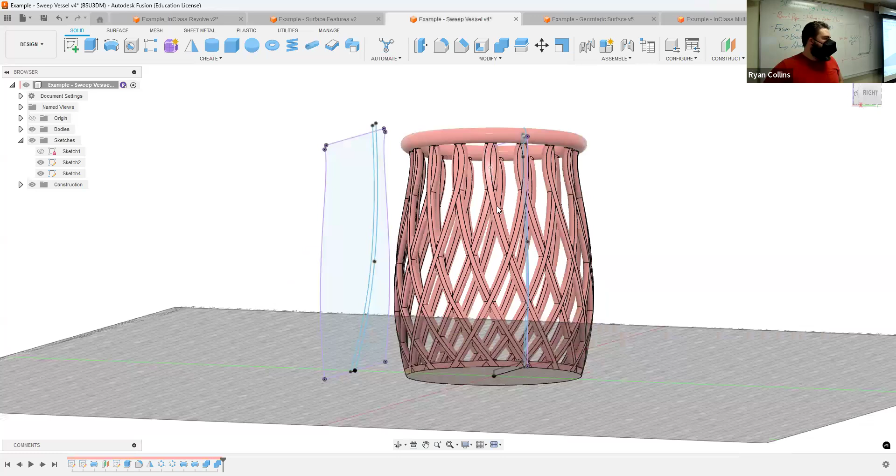There, so you can make different versions of it just like that. Honestly, the easiest way to go about it would simply be to not have something where it's going to self-intersect in the same sketch. Use something that's just an isolated element and repeat that around.

But you could do all kinds of stuff like that by just creating different patterns. So then if you wanted, you could even create things like, let's go back before that. We could even use something like this line that gets created just from the revolve. That can actually become a line, that can become a path. We could use that to then extrude out.

We could use that to emboss away, something that maybe has the effect of, let's try using the thin extrude tool on that line. It might not let us use it because it's a profile. Okay, I was hoping it would, but it wouldn't.

One of the tools we'll talk about later in the semester is the pipe tool, which basically just creates a 3-dimensional object, circle, square, triangle. Let's say circle for now, based off of any line, any edge. If I select that, I could say, oh, let's make it.

What the hell is going on here now? Don't want you to cut, I just want you to join. Why is a circle not functioning?

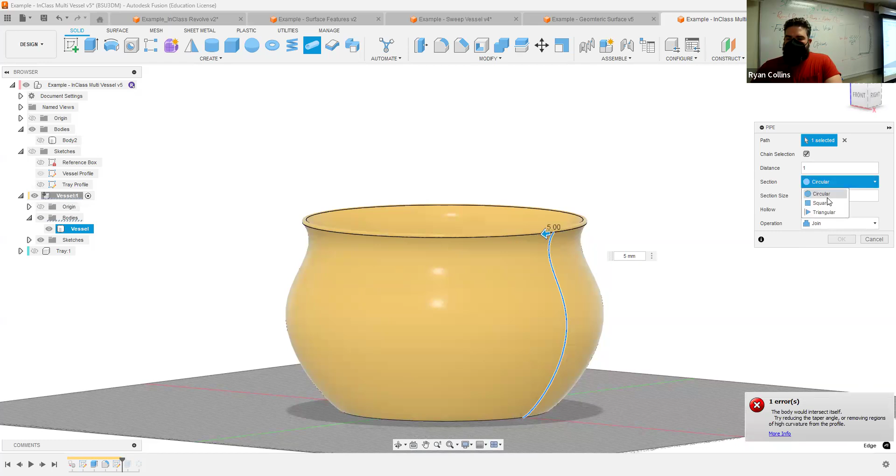Anyway, that essentially can create an edge, and even something like that, we could make multiples of. So playing with different tools and repeating the same feature, using the circle pattern for that detail around the original axis, I can start creating any number of ridges and such. I don't know, let's say 25.

Now combine stuff like that with the other features we can create, and you can start getting some really funky interactions. And even with that, since that line is on the outside, I might even be able to have those floating lines there. So combining different features with different functions will allow you to do some pretty funky stuff.

So the main thing there is with the advanced options, try using the sketch, emboss, and then circle pattern to create a wide variety of different textures and such. So that's pretty much what I wanted to show you with those. I'll pause it here, and that way, if we have anything else, we can add stuff to it.

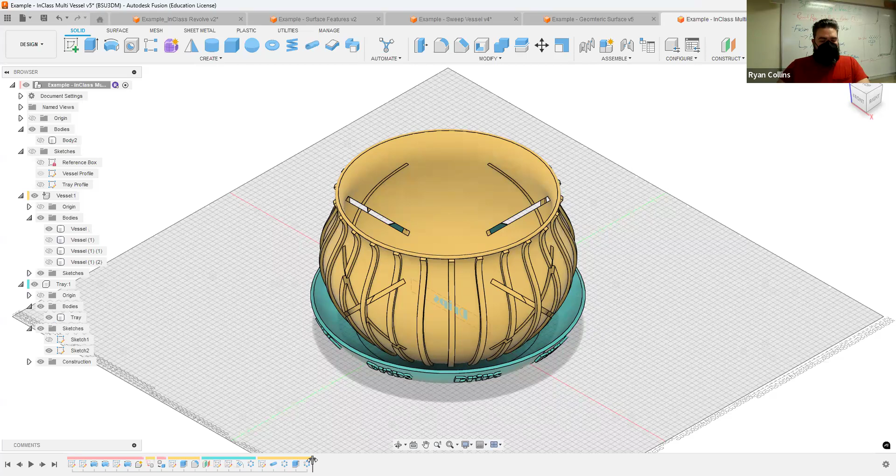So what I'm going to do is get the current model I was working with. Let me move the time slider back to before I moved anything around. And what I can simply do is just make a copy of this, that way I can have them diverge. The one I already modeled will stay where it is. This one, I'll have a version.

So selecting, and I'm just going to copy, paste. There we go. Don't need to change it, don't need to move it. Nothing. Vessel 2, snap to current.

It's going to recalculate a bunch of stuff, all the different things I did to this. Give it a moment. Okay, so it's showing this weird checkered pattern because it's two of the exact same object occupying the exact same space. That's how Fusion shows that.

So what I'm going to do is close these other objects, and now I'm back to just having that same default vessel. Vessel 1 is just the default naming, so let's rename this one vessel basket.

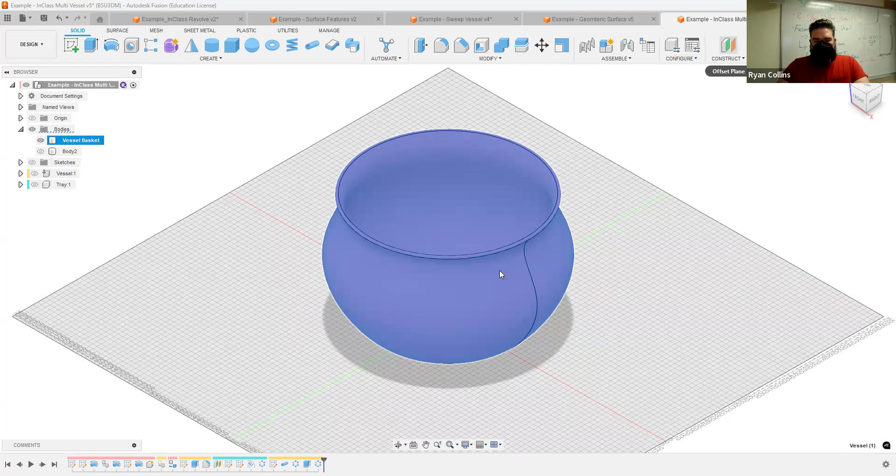So I'm going to have to redo a few things, that's not a big deal. Construction plane, floating out in front. Sketch on that construction plane, and I'm going to slice all the way through this.

Let's just draw a fit point spline starting on the right side, it's showing green, but that is the Z-axis going straight up and down. We'll curve this down and around. There we go, okay, I just want to move this to where it's more straight up and down.

Good, we'll use the offset line to make that thicker, let's say 5 millimeters. Now I just want to close this sketch, so it doesn't matter, I'm just drawing across both, pan down, across both. There, light blue, it's a closed sketch. Good, finish sketch. Now it automatically hid because I had sketches hidden.

That's all, let me open this up, and we'll say basket sketch. Okay, alright, so with that, now I'm going to use the extrude tool, select that profile, and I'm going to drag it inward.

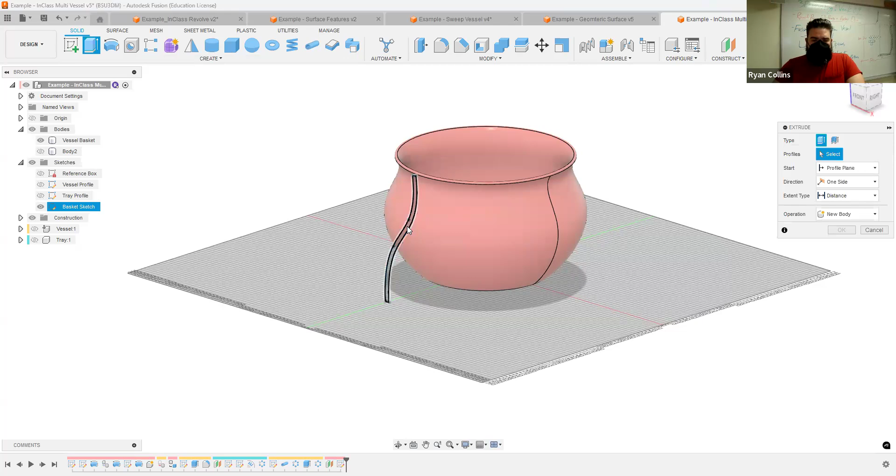And let's just go to the profile plane. So instead, I can't remember where that is, guessing, unhide the origin plane, go to extent type, to object, and I'll just snap to the origin plane. There, so it keeps it locked exactly to that spot. Hit OK, don't hit OK.

It's currently cutting, I don't want to cut. I want to show you the third option, intersect. So far, join combines things together, cut does exactly that, intersect gets rid of everything else other than just that section. So hit OK, there we are.

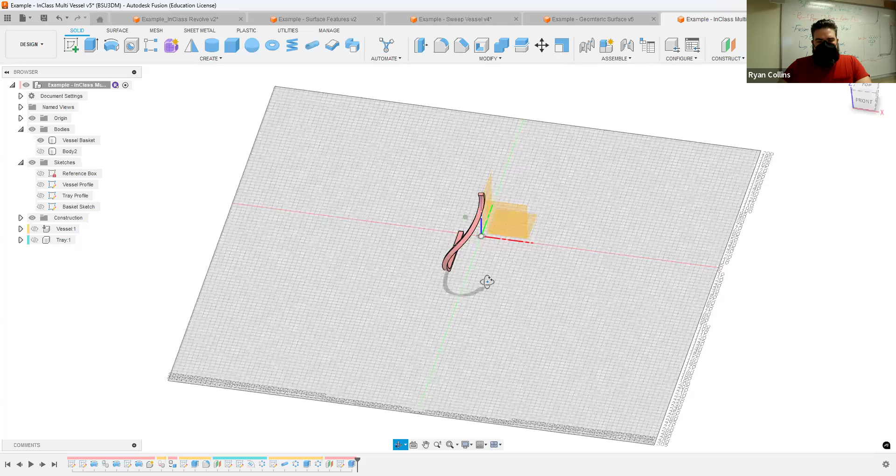Now it is helpful to go ahead and mirror this, meaning I want a second version of this. But let's rotate this around, and I'll figure out what we got first. Alright, so not revolve.

I'm going to use the pattern tool, circle pattern, not features, but bodies. I want that whole body, and I'm going to revolve it around the Z-axis. You can see exactly where this is going now. 25? Sure, we'll use 25 of them. Hit OK. Now this might bog your computer down because look what just happened, I created 25 instances of that same thing.

You know, actually I kind of like that opening. I was going to close this all up at the bottom, but I don't mind that at all.

Cool, okay, so let's simplify things for my computer. Use the combine tool, join. So target body is literally any of them, it does not matter which one. Tool bodies, click and drag to use a selection box, selects all the other ones. This might bog your computer down a bit, but this will help simplify things.

Hit OK. That instantly locked them all together. That's not bad. Now, honestly, one of the things I probably should have done was round these edges out.

So before I do that, let's save, and save as basket, because this might crash your computer.

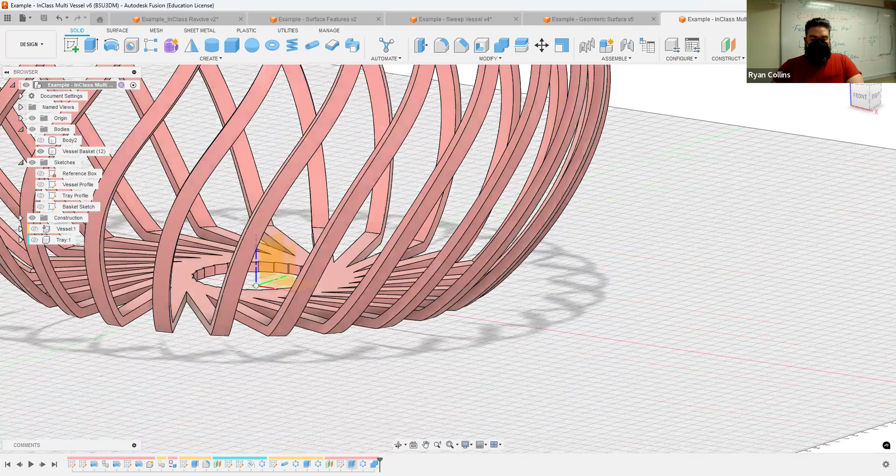So let's go back, pull the slider back before the circle pattern. And what I'm going to do is insert a new tool right between here by just moving the time slider here, and as I start a fillet...

Let's use a full round and select both faces, either side. I don't know why it's doing this tonight where it won't let me select multiple faces. There we are, full round, it just curves it around.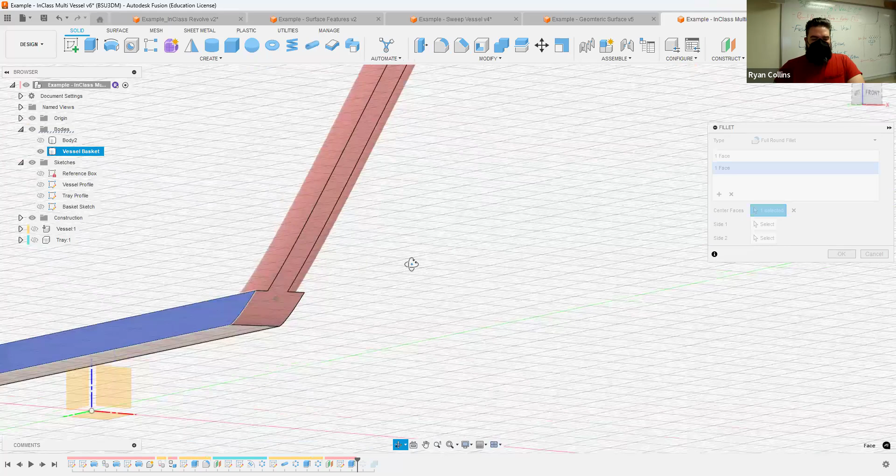That is all, I can leave the bottom square, but let's not, let's include that. I don't know why it's not wanting to do more. That is really weird. And now it's leaving this little weird flat section. Oh, always something fun, huh?

Alright, tell you what, let's cancel that, full round fillet, and we'll just use a regular fillet across the whole face, whole face. Let's try what 1 does, 1 millimeter, might be too big. Alright, I can't remember how thick this is, let's say 0.5.

Still giving me errors, that is so strange. It is just really being argumentative tonight. Alright, let's try just with the edges there. Let's try that, still giving me errors. Man.

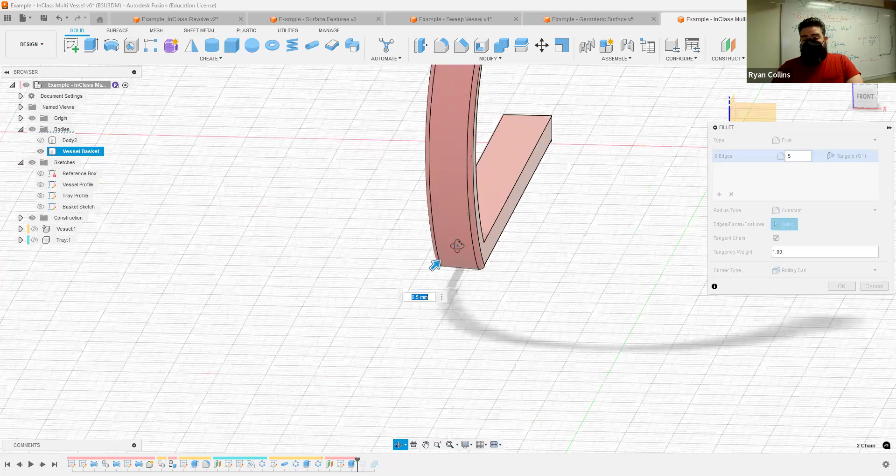So if we try a smaller size fillet, sometimes it'll get around it. All right, there we are. I'm just trying to round this out a bit, because it had this really sharp edge here. If we change some stuff around, I might be able to get around some things.

Let's hit OK. I want to round this out evenly too, so let's repeat that fillet on just those 2 edges. 0.5. There, at least the curvatures now match. Okay, that's all.

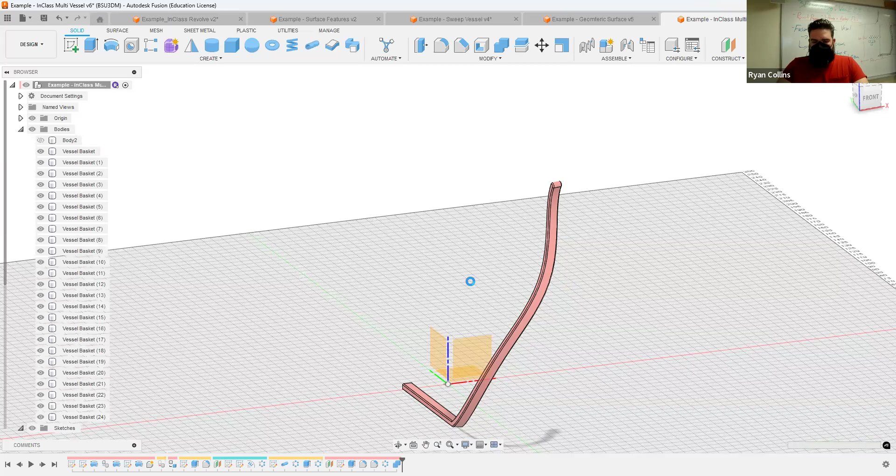Now there's some weirdness going on the inside. We can fix that if you want to make this just a solid hole, anything like that. This is going to be a really spindly thing, so if I wanted to print this, it would be really problematic because it's just really delicate. So obviously, like I did with this one, I did a mirror of the two and had two different ones intersecting because they're going different directions.

With this version, I kind of like just a simple one, but I still want to add a top and a bottom. So what I can do is close this up. Let's create a sketch off of the original part.

So what I might have difficulty doing is if I try to sketch right here, I'm going to kind of lose where I am because of all these tines here. They're all floating in different directions. So this is kind of another one of those situations where, before I extrude or anything like that, let's create a sketch that I can go back to.

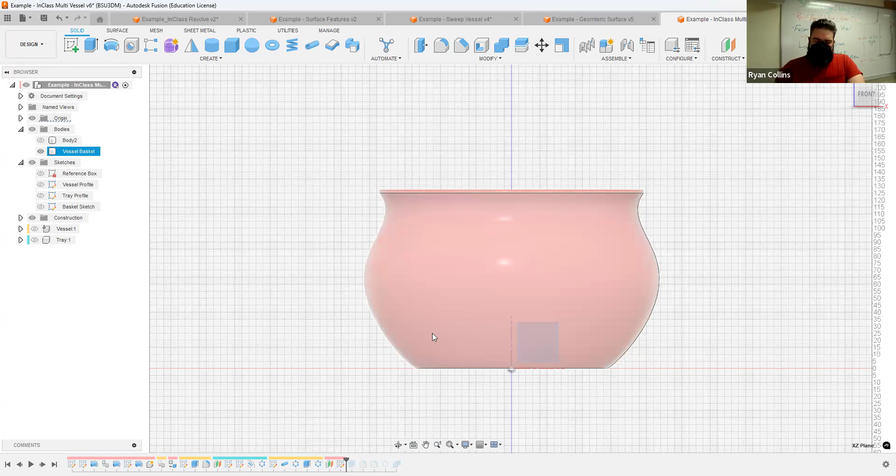That was the sketch that I made the profile, the curve profile. Let's create another sketch right there, smack in the middle, and I'm going to use the project tool and copy the whole body here, as well as that edge line.

There we go. When I hit OK, let's hide that body. So I'm left with this outline here. I'm just going to go ahead and create a circle here. Let's say a 2-point circle, so I connect those two dots.

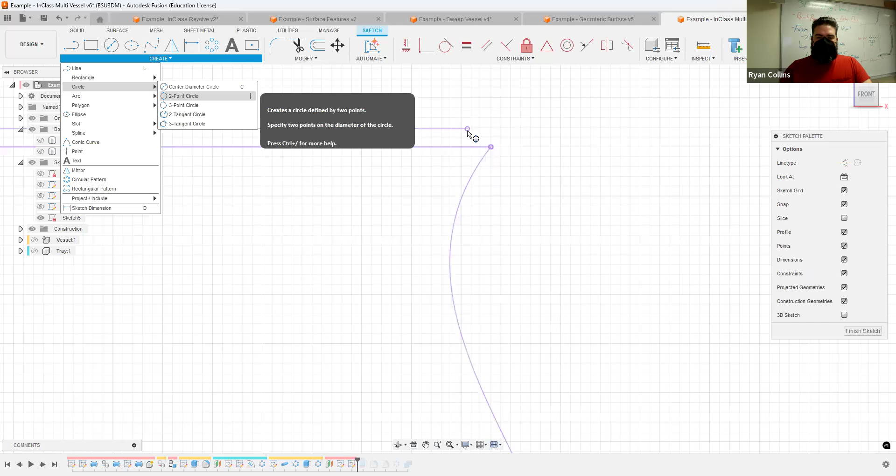Just leaves a little curve there. Great, and then let's do something here at the bottom. Yeah, let's just make a little... I've got this duplicate. Tell you what, why don't I use the offset? They're both right there. What was this, 3 millimeters?

Yep. And I'm just going to take a chunk out of this, I'll show you what I mean. I'm just going to draw a line, I don't know, there. See how that closes up the sketch? And then I'm going to do the same up here somewhere. Doesn't really matter where, I'm just making this little section here. Let's make sure that's 90 degrees from where I want to go. Oh, nope, never mind.

Just draw some more out here, and let's make it perpendicular to there. Cool. And if I want this actually perpendicular to one of these lines, I'll use the perpendicular tool. The first thing you select is what will move, the second thing you select is what it's related to. Don't know if it'll let me because it is in fact a curved surface, so ignore it, that's fine.

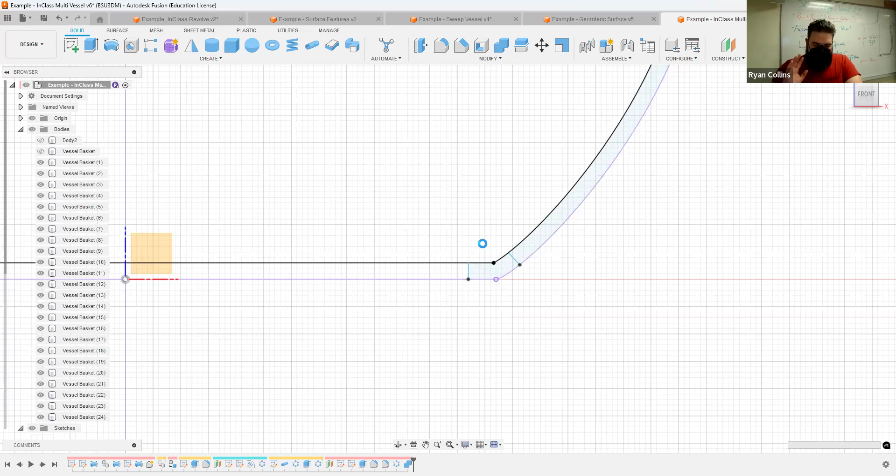Just this little chunk here. All right, let's hit OK. So I did that because I want to be able to refer back to that line, this sketch, this little section here. It's going to recalculate everything, reshow everything, do all the things.

It's always a problem when you splice something back into the timeline, everything has to come back up to current. I'll pause, let it continue. Okay, recalculated. Now nothing changed yet, because what I want to do, see, that sketch is still floating there.

So good. Now what I can do is go back, use a Revolve tool, and I'm going to select the circle out of that sketch, and then that little bottom edge right there. And then I'm going to select the axis, the standard one, the blue one, the z-axis, and it's going to create a new body.

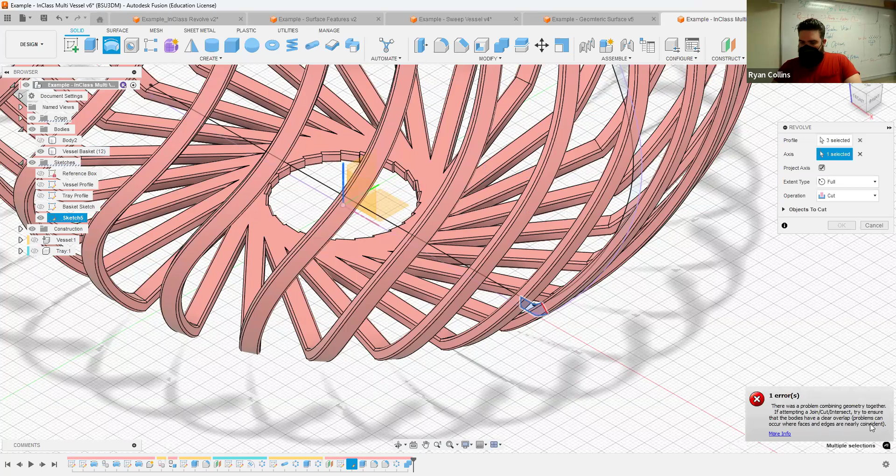Not that much to sketch, it's just a circle. Operation... oh, I didn't want it to operate anything, just new body. There we go. So now the reason I did that, see, now it's got this little ring here, this little circle connecting everything. And also at the bottom, it's got that heavier side at the basket.

So cool. Now frankly the top one's a little small, I probably should make that circle a little bit larger. I can always go back in and do exactly that, same thing. This will be kind of a pain to print because it's got all of these straight across circles here, but we can play with that too. Hit OK.

Now, of course, it did still make that different sections, meaning without the basket, it's still these floating sections here. But I can go in and just use the combine tool. Say target is the top, tool bodies are the other ones.

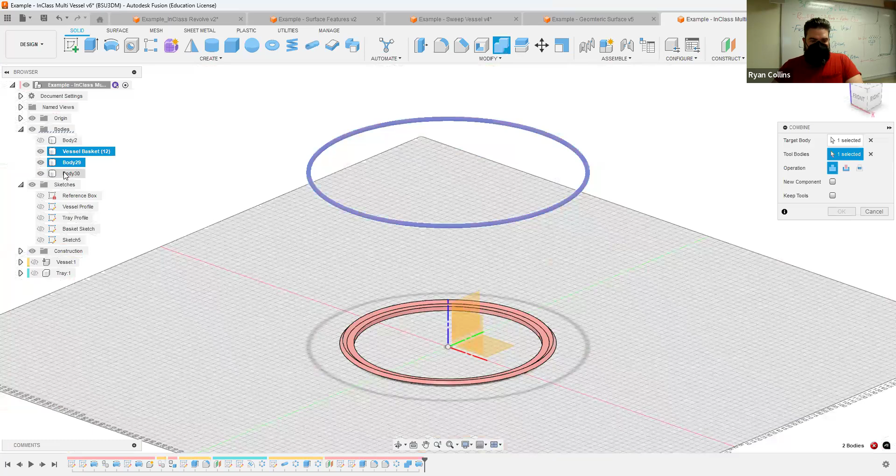What is going on here? Well, now I'm getting another error. Overlap. Faces and edges are clearly connected. Great.

It's just one of these kind of nights. All right, let's select all those, and the tool body will be the ring. Let's see if I get errors now. All right, by the bottom. I'm still getting the same error? No, the bottom, I'm not getting the error. So I can join those at least.

All right, so I'm left with that ring floating and my connected basket stuff. So what might be the problem is just that it might be leaving weird gaps and such. So I think what the issue is, is simply that I should make that ring a little bit larger diameter. So which was that? Right there, edit sketch.

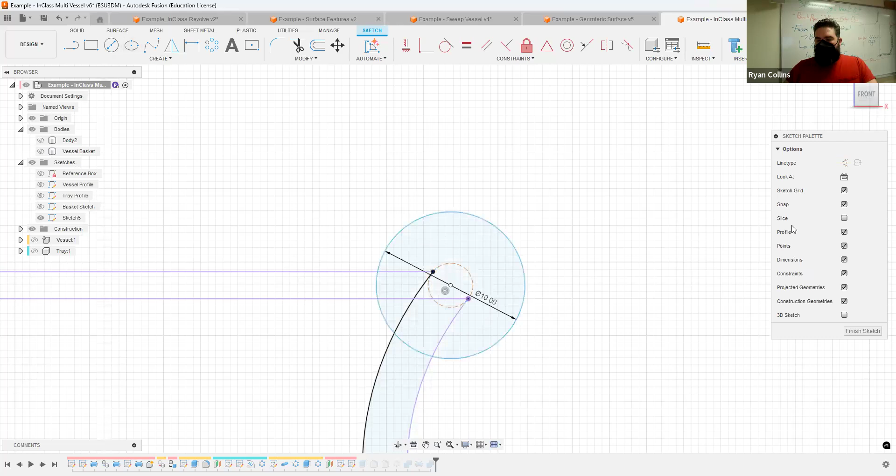So let's go in, let's just make that circle a construction line, and let's just make that circle a little bit larger. Before, I don't know, let's make it 10. Let's just make it a lot bigger. Okay, finish sketch. Oh, I shouldn't have recalculated so much.

Now it's going to keep doing this. Pause again and let it recalculate. Okay, recalculated, all that such.

Now that was just changing, and what happened there? Who knows? That is a weird one. I don't know what it recalculated to there. So let's make sure to change that up. Edit feature. Oh, when I changed that all around, it did some weird stuff.

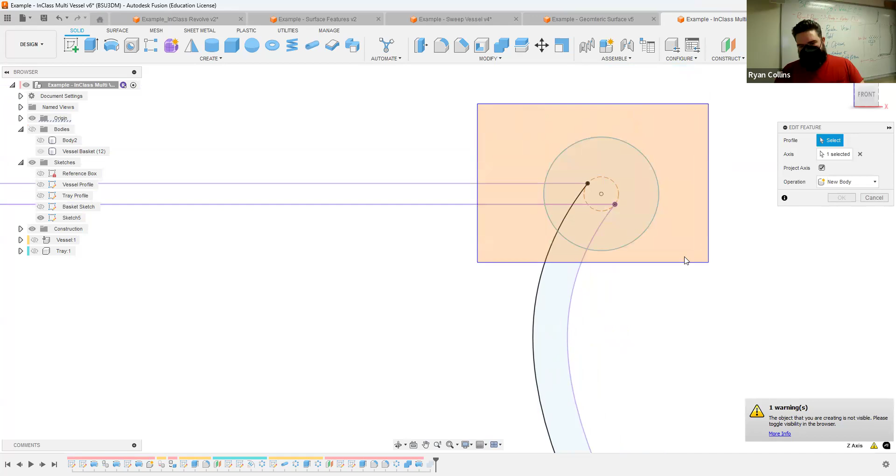So let's hide the bodies. Let's make sure we select all of these pieces. Why isn't it letting me? What is going on here? There, I don't know why it wasn't letting me select them individually. With the selection box, it let me. Wow, what a hassle tonight.

Axis, Z-axis. Currently, I have the bodies hidden. There, big, large, oversized circle there. Operation, new body. Great, hit OK. It's giving me an error for the combine.

That's all right, edit feature. Because this is where I wanted to select all the tines for the basket. Tool bodies is the new circle. Hit OK. All right, all of that frustration just to make a bigger circle.

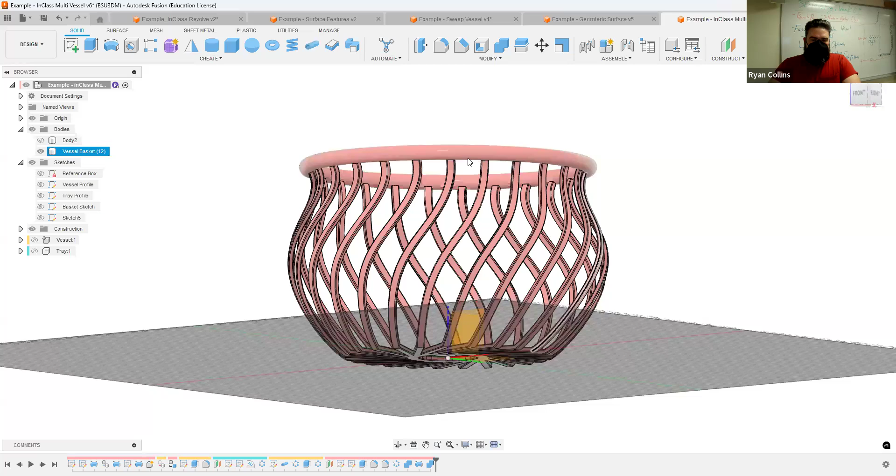There we go. So the main thing there was simply a way for me to make sure that these floating tines were not going to be an issue. As in, now if I were to print these, at least the top rung would hold them all in place much, much better. All that kind of thing.

Now, I will tell you, this would probably be a nightmare to print because of these flat sections from time to time, but that's a minor issue that could probably be solved with some clever adding of like an arc curvature or something into the mix. But for now, we're going to leave that, as I just wanted to show you how you could make a basket out of curved sections and such.

So we'll leave it at that for now, and hopefully your program is working a lot better than mine is tonight, and we'll deal with the issues as they come. So good luck with it.

Remember, basic form, add features to it, and it must have drainage holes, must have a tray and a vessel, and they should be, or they need to be, on different components unto themselves. You can, of course, add features, holes, textures, protrusions, scalloped edges, things like that.

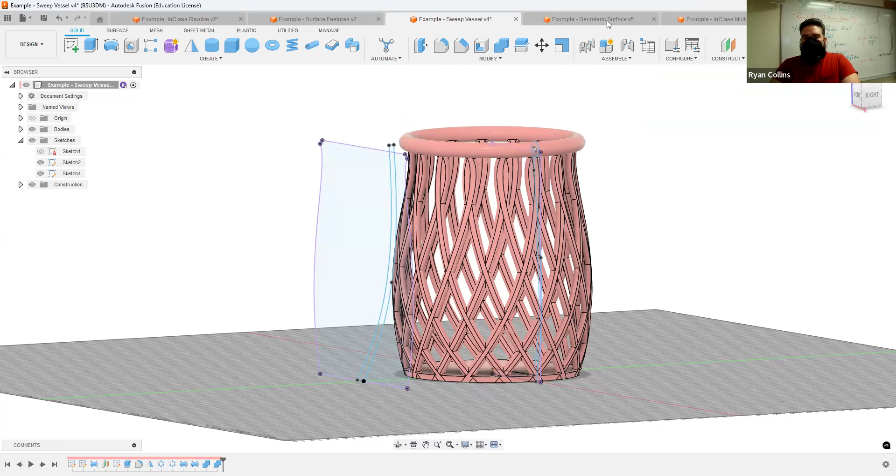Make it completely out of a sweep or a single object using combine and intersect, or go crazy. Although this model does not use Revolve, so not this one. So we'll close it anyway, and end up with the basket, all kinds of craziness. So however you would choose to interpret this, the main thing is you got your basic vessel, you got the basic components of it, or the basic elements of it.

Got to have drainage holes, that sort. From there, build out, create different models, create surface features, that sort. Experiment, play, and don't forget to save often, because if you're starting to do multiple iterations and things like this, it can really bog down your computer like you just saw. So good luck, hopefully have fun, and if you need to, take a break.